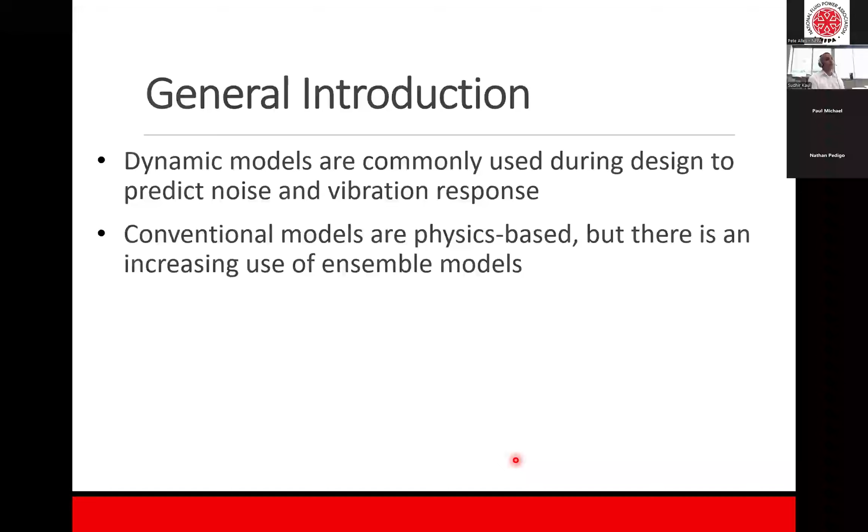So the most common models traditionally used for evaluating vibration response and predicting noise response are dynamic models. Conventional models have typically been physics-based, but there is an increasing use of ensemble models for many noise and vibration problems, because they allow us to go beyond physics models and address things like nonlinearity or interdisciplinarity between noise and vibration. A traditional physics-based model gives you a vibration model or a noise model, but ensemble models allow us to have an interdisciplinary model that represents multiple things in the same model.

The most prevalent use in ensemble models is of neural network algorithms, used to overcome some of the constraints typically posed by physics-based models. I'll subsequently talk about the use of ensemble models a little bit more later in the presentation, and they're very useful and beneficial for diagnostics and condition monitoring that we'll also talk about later on.

In terms of classification, there are various means and terminology you may encounter when looking at NVH or NVH systems, classifications or subsystems. So I'll quickly go through some of the classifications here. The most traditional way to classify noise, vibration, harshness models is a single degree of freedom or a multiple degree of freedom system. In practical systems, it's very rare to encounter single degree of freedom systems; most practical systems are multiple degree of freedom systems. However, a single degree of freedom system is oftentimes the building block for multiple degree of freedom systems, or allows us to capture the essence of many systems as well.

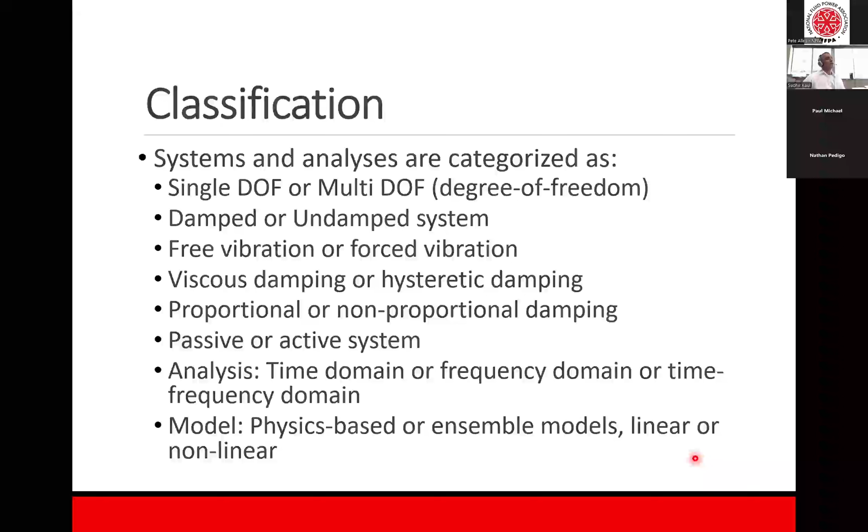There is increasing use of what's called the time-frequency domain, which is a combination of time and frequency domain together. Finally, in terms of models, the classification is generally done as physics-based models, which is more traditional, or ensemble models, which is a more recent development using neural networks or machine learning-based algorithms. And then another classification in terms of modeling is linear or nonlinear.

So we'll start with a couple of slides covering the building blocks of the typical response and characteristics of a single degree of freedom system and multiple degree of freedom systems before we go to mitigation.

The bread and butter of a fundamental poor man's vibration model is a 1 degree of freedom spring-mass-damper model, shown here with the spring, damper, and mass or inertia of the system. The typical response of a single degree of freedom system looks like this. In the modeling world, typically you start with this and get here; in the testing world, you start from here and reconstruct the model. Both are very commonly encountered in many applications and industries.

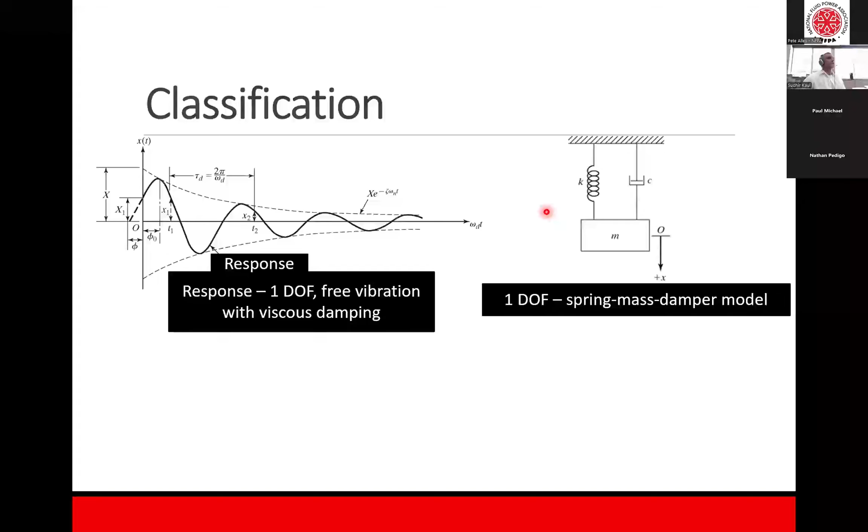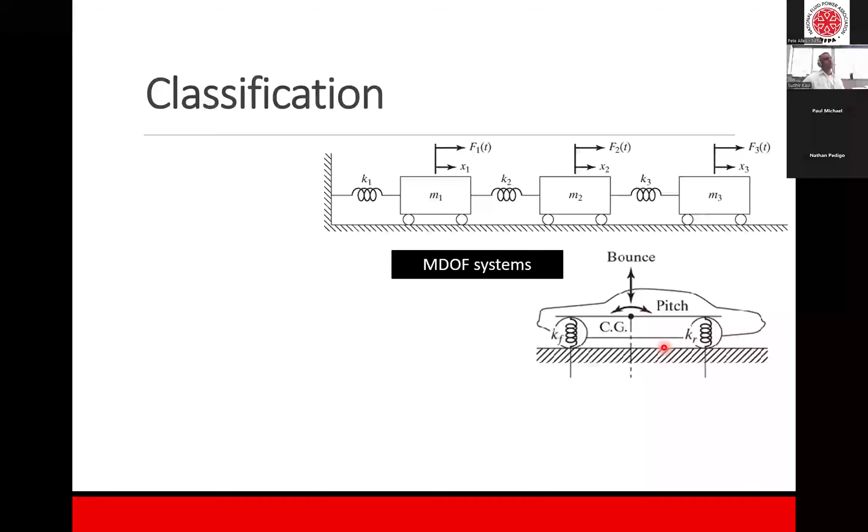The counterpart to the single degree of freedom system is a multiple degree of freedom system: 2, 3, 4, and so on. Here are two cartoon sketches of what a multiple degree of freedom system would look like. This system has 3 degrees of freedom, 3 lumped masses used to characterize it. This is an automotive application with 2 degrees of freedom, bounce and pitch, which are coupled together, representing the planar dynamics of the system.

The second thing that becomes important in multiple degree of freedom systems is the corresponding mode shape of the system, which we don't see in a single degree of freedom system because there are two modes you're looking at, not just one direction or one coordinate. In the testing world, you test the system to gather the natural frequencies, do modal testing to capture the mode shapes, and then go back and build the model. In the modeling world, you go the other way around, like we said in the previous slide.

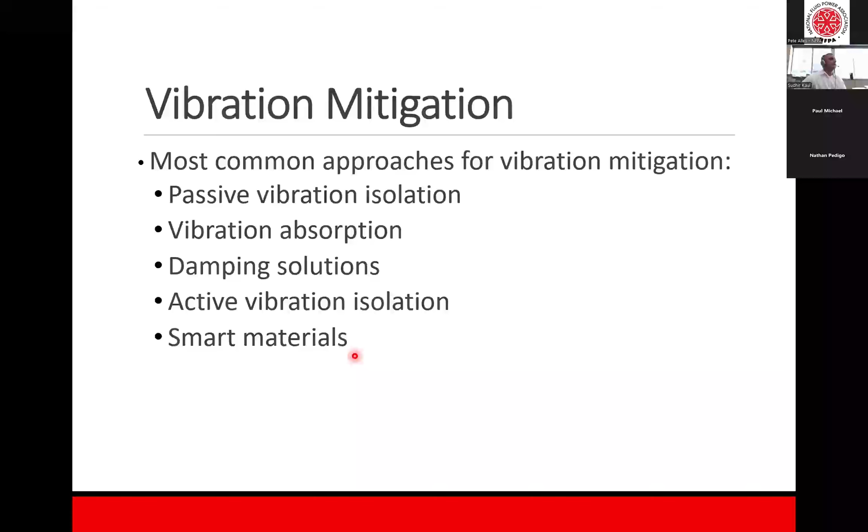With that quick background, I want to talk about mitigation strategies for vibration. I've listed the most common ones used - some are more traditional, some are modern and non-traditional at this point in time. We'll start with simple passive vibration isolation, then vibration absorption, damping solutions intertwined with active vibration isolation, and smart materials. The last two are more modern, increasingly used in the last 15, 20 years.

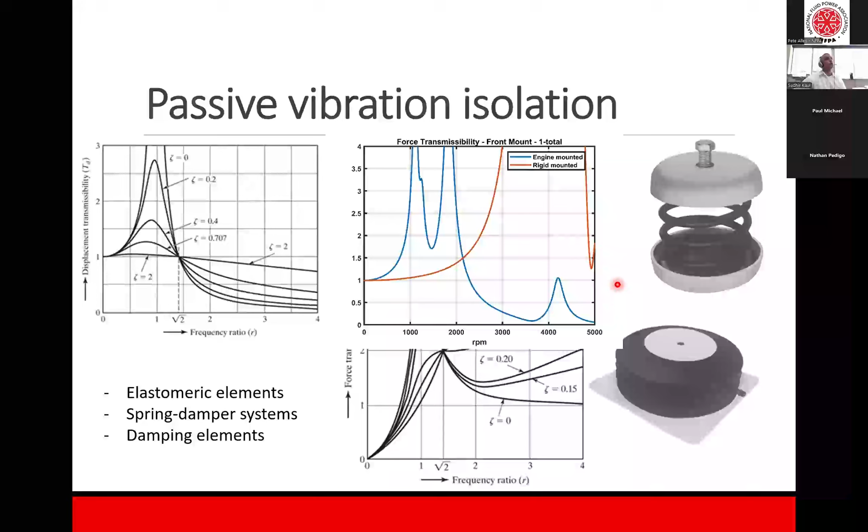There are many manufacturers that will provide you with a large catalog of parts that looks like this, or this, or this - there are 4 or 5 big manufacturers. I've borrowed these figures from Trelleborg, one of the big manufacturers, but there are other manufacturers who will provide a catalog of parts and even help you identify a solution that works for you. If your production volume is large enough, you can customize, pick and choose, and build a mount or an elastomeric system that's some combination of these, developed in collaboration with the mount manufacturer.

The second solution in vibration mitigation is typically called vibration absorption. A cartoon sketch rendering of that looks like this. The system we are looking at is a single degree of freedom system, which is isolated. This is the isolated system, and this is the single degree of freedom system. This is what we call the dynamic vibration absorber, where we have added an inertia or mass with a stiffness and/or a damper to the system to particularly target a single frequency of operation.

The solution for this would look like this. If the x-axis you're looking at is the frequency ratio, without the absorber, so without adding this entity, you're looking at a response which looks like this.

If the frequency that you are interested in is in this range, then adding an absorber with this mass ratio shifts the frequency into two frequencies, one to the left, one to the right. However, the response in this particular range is significantly mitigated, as you can see here.

The ironic thing here is, unfortunately, the terminology used in the industry is called vibration absorption. Vibration is not really absorbed anywhere because you're not absorbing the energy anywhere. You're just adding a system and then moving the frequency response such that the frequency range you are interested in sees a much smaller response as compared to the frequencies you were primarily targeting.

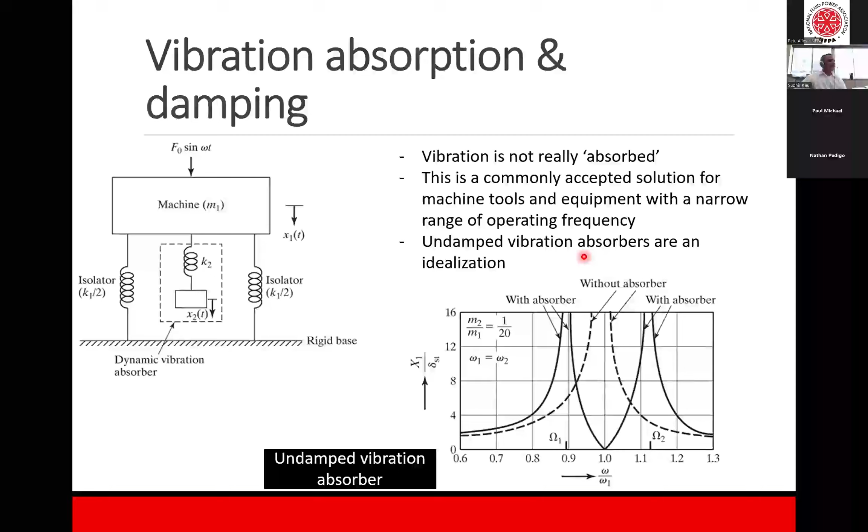So to summarize, the damped vibration absorber is a realistic representation of a viable solution for a vibration absorption system. A spring damper with an additional mass is what we are basically looking at as a practical way of adding the vibration absorber. Design decisions on tuning the absorber typically entail the selection of a mass, selection of the stiffness, and corresponding damping associated with that stiffness.

Absorbers are relatively more common in stationary applications, or like I said, in machine tool applications where the frequency you are interested in is very narrow.

The counterpart to the last two mitigation solutions I talked about is use of smart materials and use of active vibration isolation. So I'll start with hydro mounts. Although hydro mounts don't by themselves classify as a smart material or an active vibration solution, they are a step in that direction.

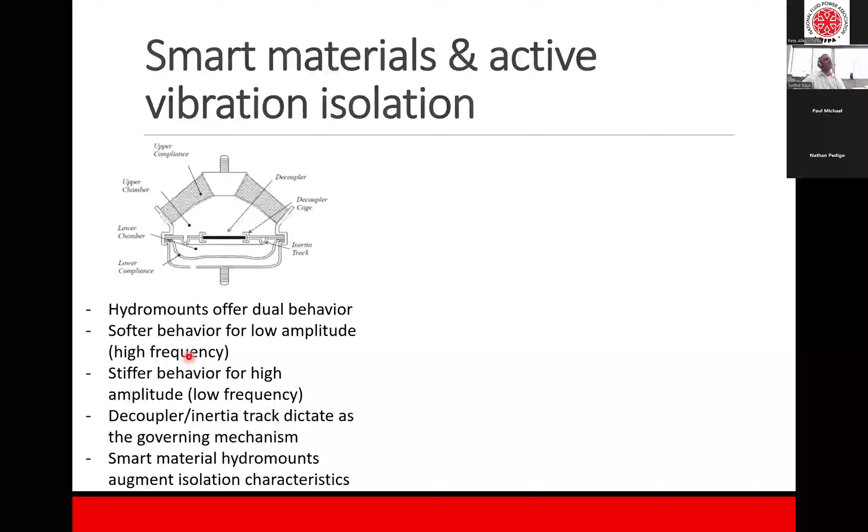Further augmentation of hydro mounts or smart materials in general is the use of MR elastomers, or magnetorheological elastomers, which allow variable stiffness and variable damping characteristics.

The fluid itself has been used in many damping applications for the last 25 to 30 years. It is a suspension of micron-sized magnetized particles dispersed in a carrier fluid with additives.

But the MR elastomer itself, MRE, is a composite material that consists of an elastomeric matrix as the core of the system, with MR particles used as the filler material.

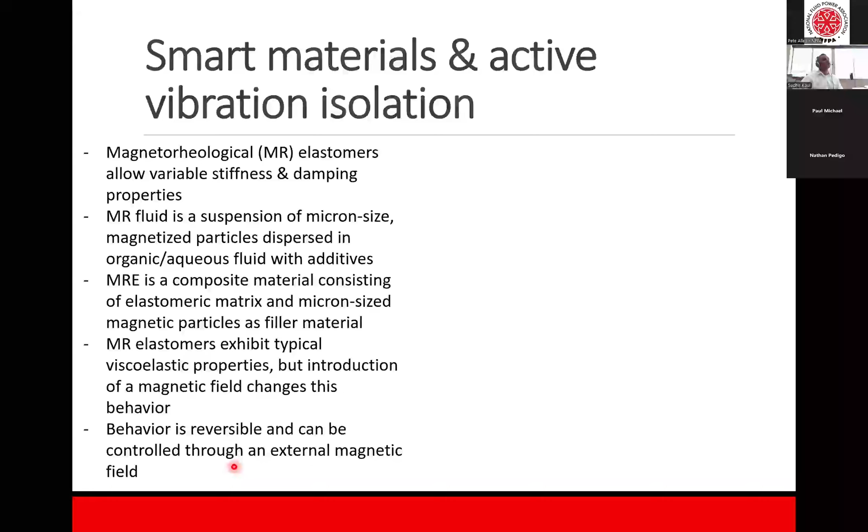This allows the MR elastomer to exhibit a typical viscoelastic property when there is no external magnetic field introduced. But when a magnetic field is introduced, you start seeing different behavior of the MR elastomer. Luckily, the behavior is reversible, so it can be controlled through an external magnetic field.

The modeling aspect of MR elastomers is slightly more complex than the typical single or multiple degree of freedom system cartoon sketches I showed earlier. Nonetheless, it's more and more prevalent now, and some manufacturers have started using MR elastomers or MR dampers in many high-end applications.

I'll take a small break here and see if there are any questions before we proceed to noise mitigation.

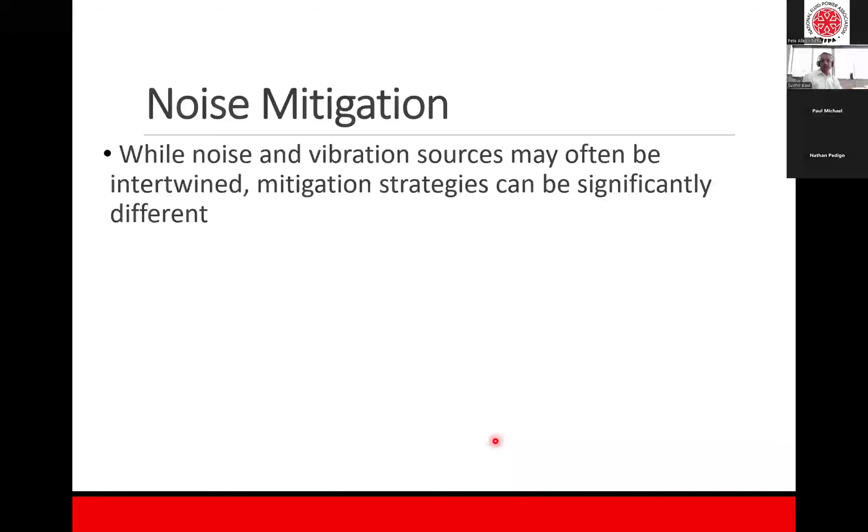As I mentioned earlier, while noise and vibration sources may often be intertwined, the mitigation strategies can be significantly different. The solutions for vibration mitigation may be very different from the solutions for noise mitigation. In fluid power systems particularly, I know we have a subsequent speaker who may be addressing this directly.

The pump is often the primary source of noise. So the design approach is either going after the source of noise, or leaving the source alone if the solution is too expensive, and then looking at alternative methods to mitigate noise.

The mitigation strategies could vary from fluid wave actuators, suppressors, silencers, or attacking the root problem, which is the design of the pump itself.

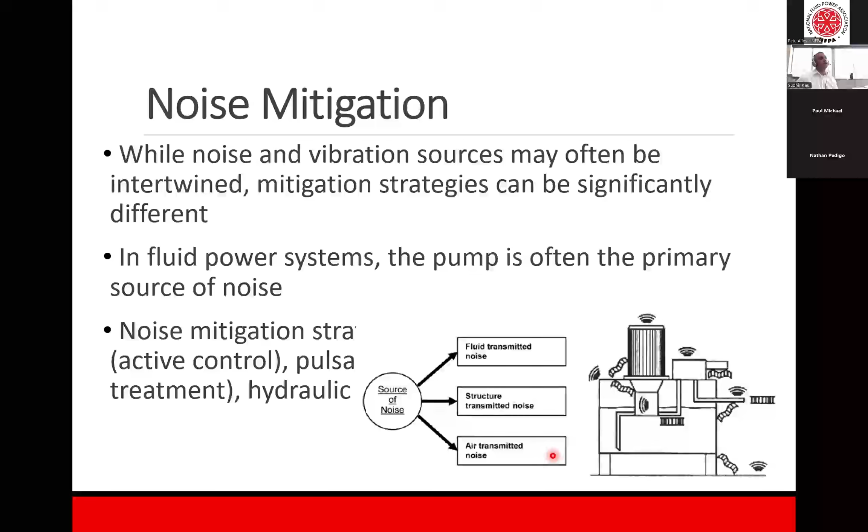Overall, in terms of transmission, particularly for fluid power systems, we are looking at different kinds of transmission: fluid transmitted noise, structural transmitted noise, or air transmitted noise. Each one of these has different solutions and different mitigation strategies.

I have borrowed from reference literature to encapsulate noise mitigation, particularly in the context of fluid power systems. I think there are a couple of subsequent speakers who may talk about these in much more detail than I have captured here.

What makes things more complex, particularly in fluid power applications, is that the fluid power system gets designed and then used in different applications. The noise may result from interactions between several subsystems, making it even more challenging to have a universal design which can address all the noise mitigations.

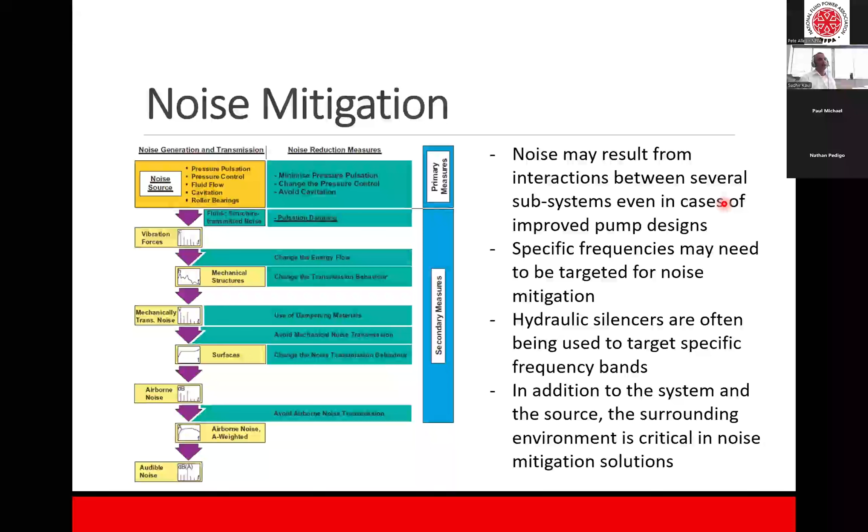Furthermore, specific frequencies need to be targeted for noise mitigation. Hydraulic silencers I have seen in recent literature are often used to target those specific bands. In addition to the system itself, the surrounding environment is very critical in the noise mitigation solution. So there is no one solution applicable to all kinds of applications for fluid power systems or any other systems in general.

A relatively recent offshoot of NVH is condition monitoring and system health monitoring. So the next couple of slides, I'll talk a little bit about the use of NVH for condition monitoring and SHM, which is the structural or system health monitoring.

Condition monitoring typically entails the use of sensors and data collection, and it could be vibration related or non-vibration related. For example, collecting vibration, temperature, pressure data, etc., to reduce an unplanned stoppage or maintenance. The governing principle here is that we want to collect data so that we can predict failure and prevent failure by intervening before failure happens.

It plays a critical role in enhancing productivity, improving safety, and scheduling preventive maintenance. The most common techniques I have encountered related to NVH are acoustic emission, thermal imaging, and general vibration monitoring, which are very common for condition monitoring in general.

The typical methodology is encapsulated in a couple of figures I have shown here. Generally, we'll do some experimental design and some simulation modeling that ends up resulting in a database that is built to then diagnose the condition monitoring that one is targeting.

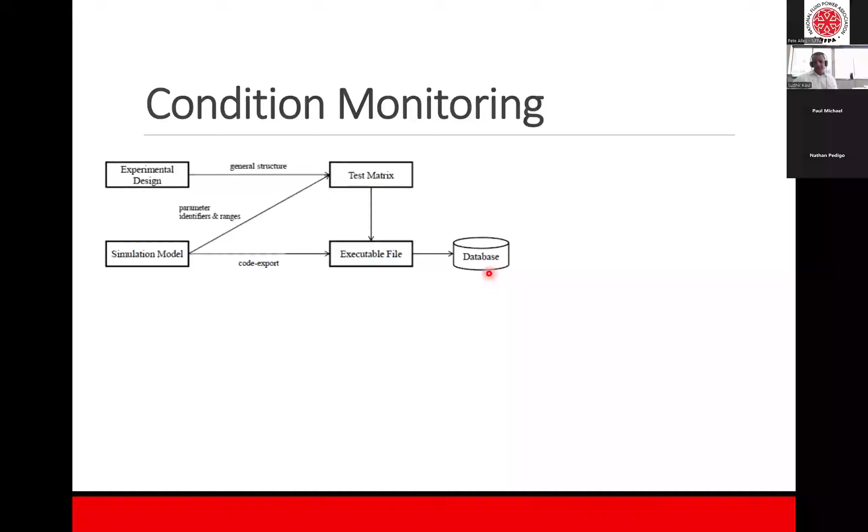Specifically looking at vibration testing data, the vibration data is collected and then fed through different kinds of models. Here I have borrowed a powertrain example, fed into an ensemble model where you diagnose different kinds of failures. For example, a tooth failure, a surface wear, etc., are the different kinds of predictions resulting from condition monitoring and ensemble modeling.

There is an increasing use of deep learning in ensemble modeling, and an increasing use of machine learning algorithms. The development of ensemble models is happening in conjunction with the development of digital twins in some large complex applications where folks do have the data and the bandwidth to develop a digital twin of a large complex system.

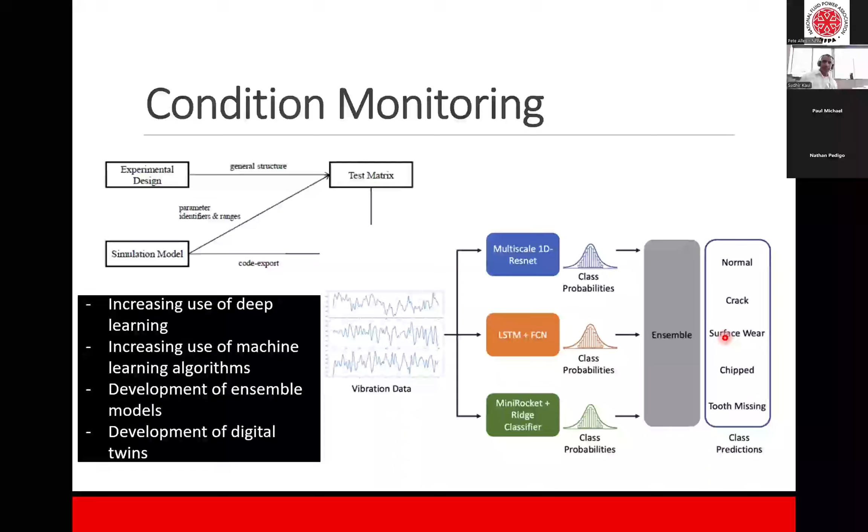The use of SHM, structural health monitoring or system health monitoring more loosely, could be explained as an extension of condition monitoring. In other words, CM is a subset of the overall system health monitoring or structural health monitoring of a system.

SHM typically pertains to the continuous vibration data collection for large and complex systems. The aim of data collection for SHM is typically much broader than just condition monitoring, where you are focused primarily on enhancing productivity or enhancing safety by intervening before failure happens.

Augmenting physics-based models or developing ensemble models, building digital twins are all larger goals of SHM, which are in addition to just system maintenance and condition monitoring.

Sudhir, we do have a question. Yes. The question is, are the magnetorheological damping response times fast enough to be used in vehicle suspension systems?

Yes and no. If it is a typical damper that is used, the answer is that the response times are slightly longer, but we are talking about milliseconds. But if it is integrated with the use of elastomers, the response time is much faster, because then you still have the fundamental damping and stiffness offered by the magnetorheological fluid in conjunction with the elastomer matrix that's being offered.

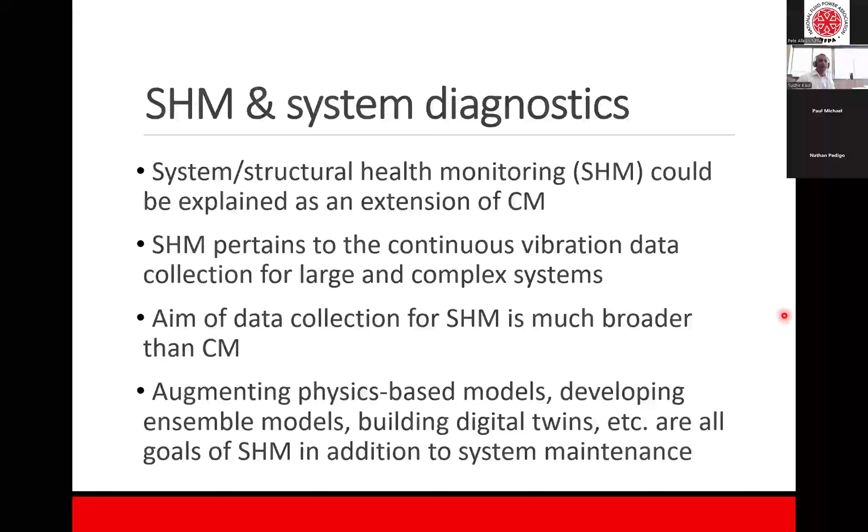So next few slides on NVH in fluid power. I hope that excites folks a little more than the rest of the previous presentation. I'll talk a little more about the use of NVH in fluid power in different ways, and I hope that this is a good building block for subsequent presenters who will talk in a lot more depth on fluid power.

The pressure and flow demands in fluid power applications can vary significantly, as most of you may know much more than me. Independent metering solutions have been increasingly used to reduce energy consumption in many fluid power applications. Although they may reduce energy consumption, they do end up giving us a little bit of a penalty in lower damping and therefore increased vibration.

So when I talk about independent metering, this is what a typical sketch looks like. I have borrowed these sketches from a couple of references, which I have listed at the end of the presentation, so folks can look at this in more detail by themselves as well. The typical gain between the traditional system and an independent metering system like this is, like I said, the big gain is saved energy. However, the small price to pay is lower damping, therefore higher vibrations in these cases.

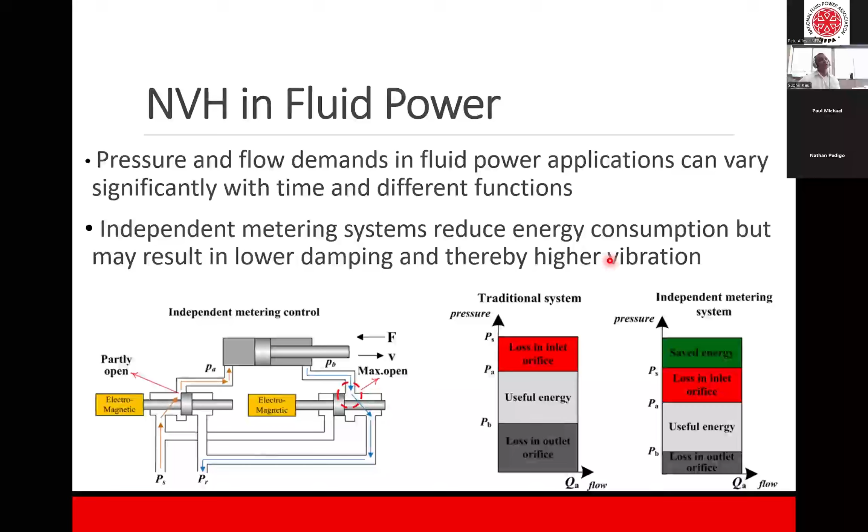There are multiple solutions of enhancing damping in fluid power systems. I'll quickly show a few examples here and we'll talk through all of them. I picked four from a couple of references I was looking at. Let's start with the most basic one, physically adding damping to the system to enhance the overall damping of the system.

Another possible means of achieving the same without adding physical damping is the use of an accumulator, which is common in some fluid power applications. But there are even other options, like using the positive opening valve shown here, or using a bypass valve shown here. There is no slam dunk here. All of these come with pros and cons, with response time, increased cost, complexity, and so on and so forth.

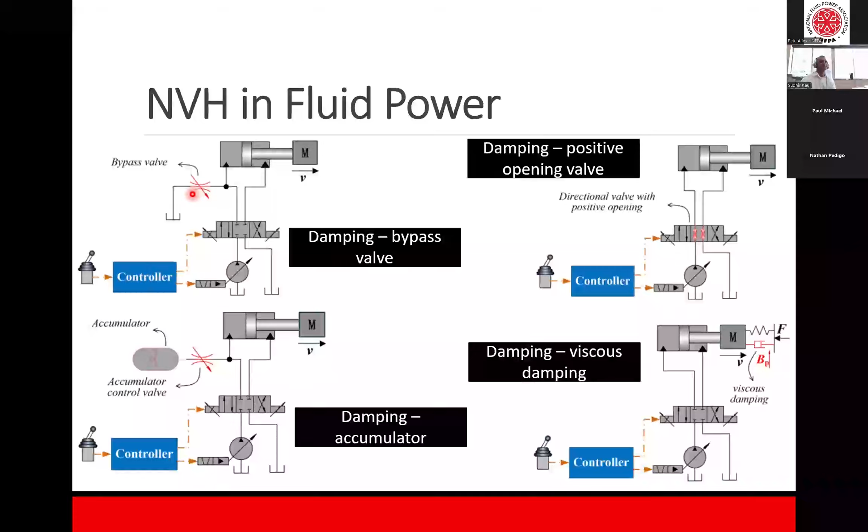In fluid power applications, based on what I have seen in most of the recent literature, acceleration feedback or pressure feedback provides additional means of control that can be used for enhanced damping in most systems and applications. Hybrid methods that combine pressure feedback with active damping do demonstrate a very high amount of vibration mitigation in many fluid power applications.

And finally, in mobile hydraulic applications, the complexity of mitigation is even greater because there are intertwined considerations associated with machine life, the application you're designing for, operator comfort, safety, etc.

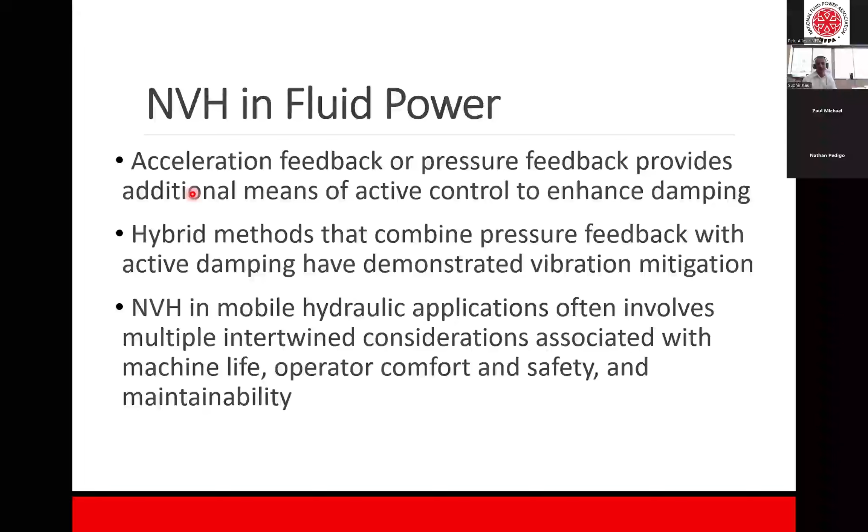Finally, as I mentioned before, design changes, material selection, damping, environmental design, and protective gear are all possible means of mitigation, particularly for noise.

Stefan, can you please load your presentation? Share your presentation. Yes, I will. Thank you for the introduction. Can you hear me good? Yes, we can. Very good. So I make sure here that I get started. Let me see, there it is. Now it's back there. Show caption. Can I ask you something? Yes, oh now I see it's green. Perfect.

Welcome everybody, and thank you to the presenter before me, because I think this will be a follow-up to what he was talking about, and give you some ideas how customers are actually testing products in vibration systems.

I already had a nice introduction, so I'll continue to explain what I'm going to talk about today. First, I'll give you a little background about MTS if you don't know who we are, a little bit about what our components are testing on our vibration systems, and then a very high level about vibration testing and examples of test solutions. In the end, I have 3 real-world applications, how customers are using our system to solve different issues: battery pack testing for vehicles, fuel tank testing, and fuel slosh systems. It may not be directly applicable to what some of you are here for, but it can give you ideas of components that are part of any fluid analysis in a laboratory.

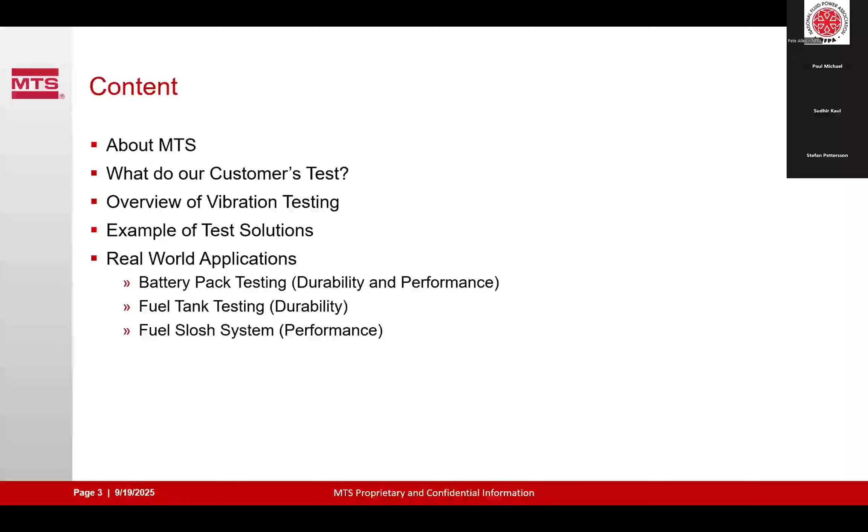So a little bit about MTS. There's a link at the top, and this presentation will be shared, so you can learn more about us there. We are located in Minnesota. We have affiliates in Sweden, England, Germany, Italy, France, India, China, Japan, and Korea. We also work with business partners. We were founded in 1966, and we were acquired by Illinois Toolworks, ITW, in 2021.

So what is MTS doing? We are providing hydraulic and electric test equipment solutions and services globally. We have 4 business units. We have ground vehicles, GRV for short. Here we work with customers providing passenger cars, light truck, heavy truck, rail, Formula 1 racing, motorcycles, ATV, etc. We work with OEMs, contract test labs, sub-suppliers, and even universities.

The next business unit is materials. We also do structures and aero, and service and aftermarket. In materials, you're looking more into strength of materials, small specimens to understand the properties of a material. Structures and aero - structures are mainly doing earthquake testing, primarily for medical equipment but also for buildings. We also work with aero customers that are designing and manufacturing airplanes. A key part of our business is our service and aftermarket products. We don't do any testing ourselves; we provide solutions for our customers.

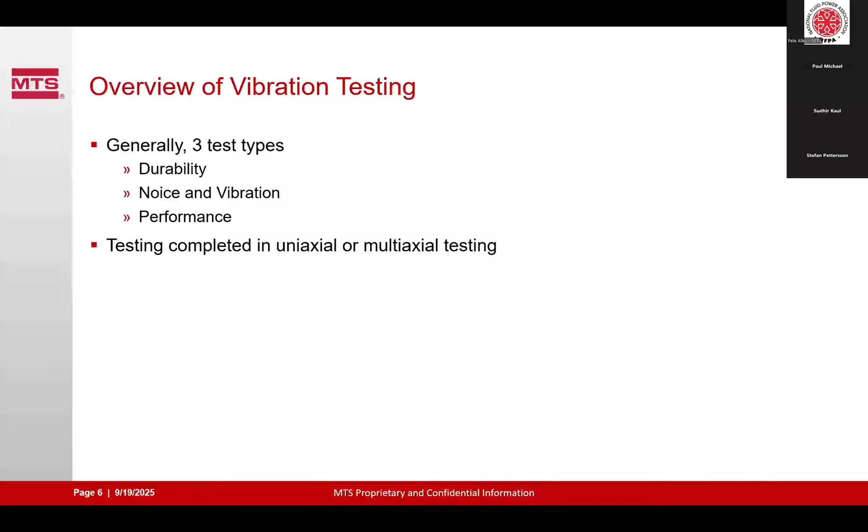So for durability testing, you're reproducing acceleration and time histories or power spectral densities, the environment that the test object is exposed to. These tests are usually run to failure or for the duration of its expected life.

Noise and vibration testing are typically lower amplitude tests, can be a combination of time history and sine sweeps. And here we can also integrate our vibration system into an anechoic chamber.

Performance evaluation is kind of a combination of durability and other effects. So here we can again see transmissibility as ride comfort, human in test space, but also aging. So we can install our system in temperature chambers or environmental chambers and expose the specimen or the test object to both temperature, humidity, solar, such as heat load.

Talking about testing requirements, it's important to understand how the component is exposed to vibration. There are different ways to define what the requirements really are.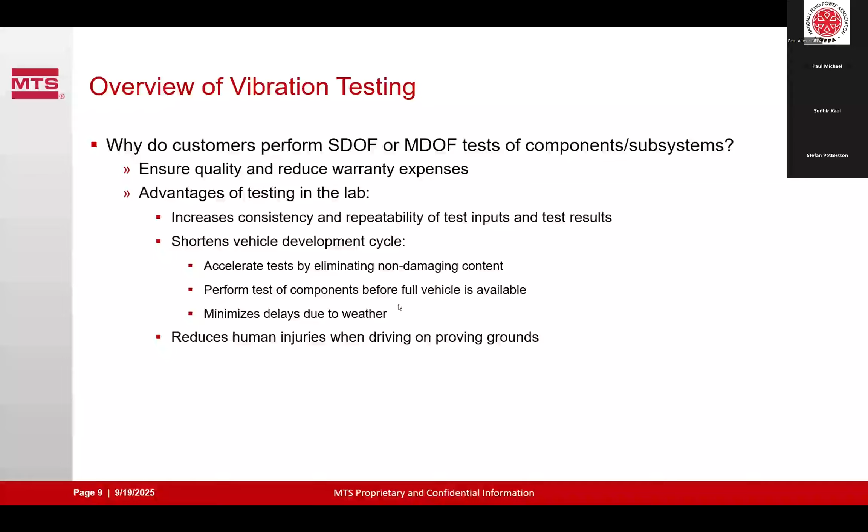So coming back to this proving ground, that was how customers developed and tested their vehicles in the past. Here they ran 2 shifts per day, and for about 6 months, to validate the life of a vehicle or a component.

So I can make a break here and ask if there are any questions. So I don't think there are any questions. No questions at the moment.

Okay, so here you see some example test solutions that are sized for, in this case, table size or mounting surface. Also for mass, we will size an actuator for the specific specimen and for the control band frequency.

So what you see to the left here is a uniaxial system that is vertical.

It's a hydraulic test system, from MTS. What you see in the middle is an electrodynamic shaker system. There are many benefits with both hydraulic test equipment and electrodynamic test equipment. MTS doesn't provide electrodynamic test equipment like you see in the middle, but they're frequently used in uniaxial test systems, and here you can reach frequencies much greater than with the hydraulic test system. The system to the left, you can probably test up to 100 or 200 hertz. The systems in the middle can probably reach control band frequency up to 2000 hertz or more. The picture to the right is a MAST system - a multi-axial simulation test system.

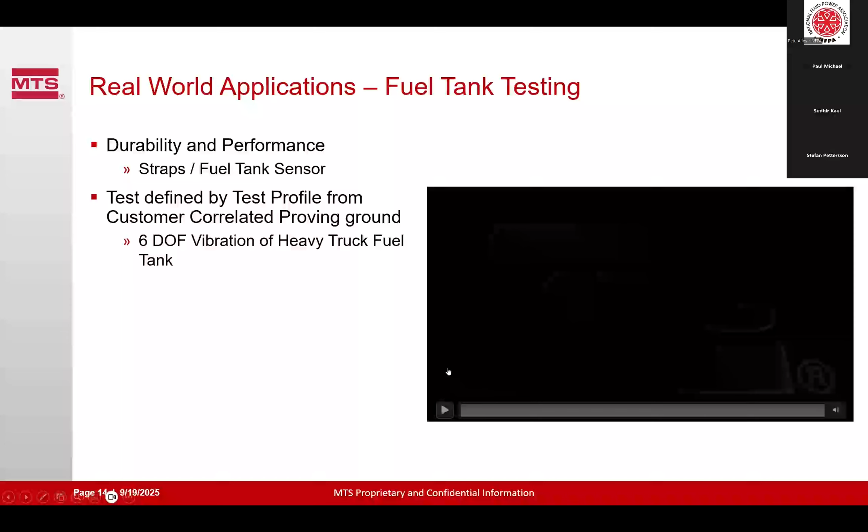So this is a test fixture that the customer built. Here's the truck frame, here's the fuel tank, and they were validating the straps holding it in place. They were failing the straps out in the field, and this system helped them solve that—they had no issues with the straps after this.

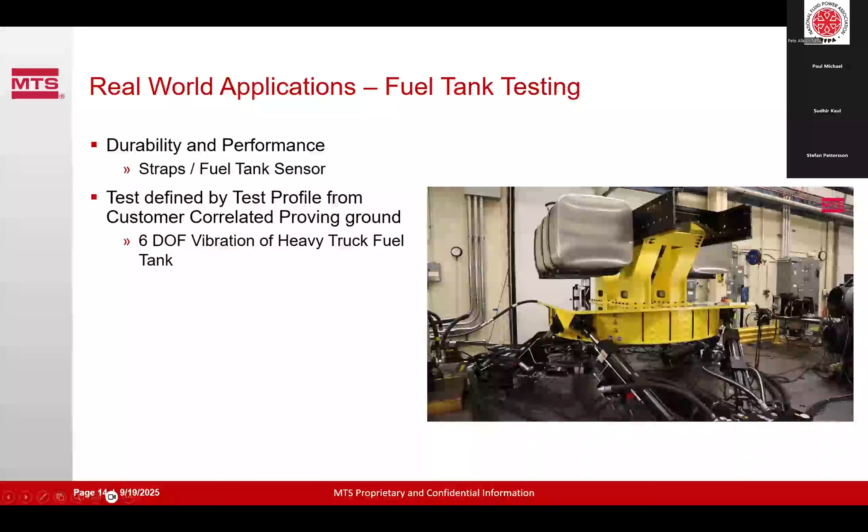So I have one more here. Let me see if there's any more questions in the chat or not.

So the last one here is a fuel slosh test for an airplane application. I can't show a picture here because I don't have permission from the customer to do so, but I can at least show the system and give you an idea of how they tested this one. Again, it was both a durability and performance test—I'd say more a performance test than durability—but it's looking at the fuel tank sensors in an airplane wing.

In this case, they had 105 sensors that were monitored consistently during the test. The idea was to test and make sure the sensors were functional at all times—they had redundant sensors too, of course, but with different fuel levels in the airplane wing. The test was defined by airplane wing motions: landing, takeoff, etc. There was a 2-degree-of-freedom vibration airplane test, where we control the system into roll and pitch, with the profile being sinusoidal or triangle form.

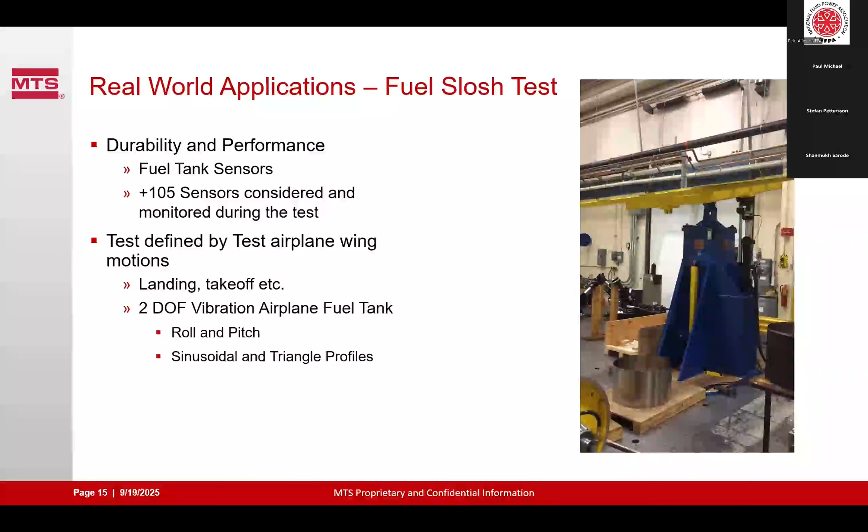So here you can see the system—the airplane is taking off in this case, very steep, and then the next event will do a dip down as they're doing it. It doesn't look as dynamic as the other one, but the idea here was really to test and make sure the sensors inside the airplane wing were functional at all time.

So I think that's pretty much what I had for today. I can definitely follow up with some ISO standards for NVH testing. The majority of what our customers do is durability testing, and when they do NVH applications, they're mainly listening to, for example, dashboards, seats, and doors, because they want to minimize the sound inside the vehicles to make it as comfortable as possible. The only standards I've really seen around it for other applications are around seat testing.

Stefan, this is Pete. I see there were a couple of questions put into the chat—let me give you some of these. One of them is: how are the test machines actuated? Do you find this to be a limitation to create an equivalent vibration profile to what you see in the proving grounds?

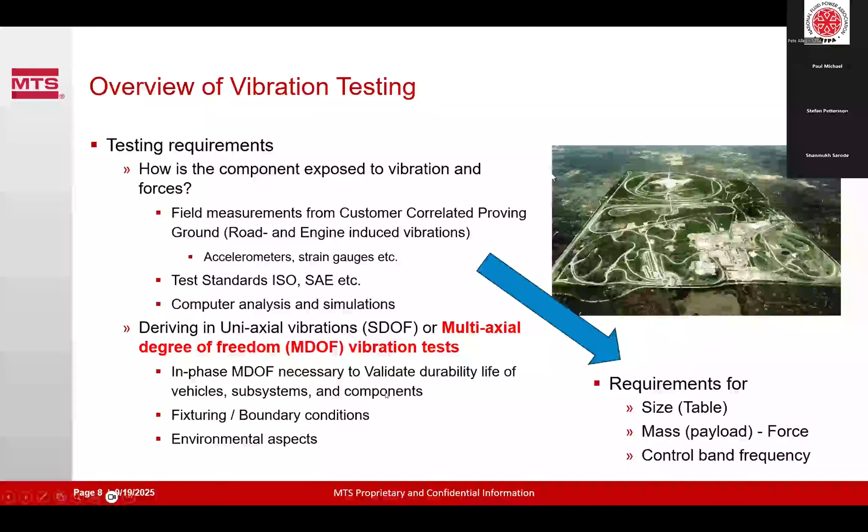Coming back to one of my earlier slides, when you're moving from the proving ground into a test, the fixture and boundary conditions are critical, and it's very challenging for customers. If you're looking at this battery pack testing, for example, we have a stiff table, and this is a pretty condensed design of a battery pack because it's agricultural. But if it were a car battery pack, it would be more distributed and part of the structure of the vehicle. So on a MAST system, it can be very challenging to see all the modes of the battery, because you can't induce any twisting and bending modes. There are solutions for it, but it also increases the complexity of the system. So it's definitely a challenge to move from the proving ground into a test environment.

Okay, thank you. Another question: how important is it to also take into account rotational accelerations? I would say it's critical, but the minimum, as I see it, would be 3 degrees of freedom. That's usually what you see. So if you're thinking about a battery pack again, there are rotational accelerations around X, Y, and Z, and we are trying to provide those as well. In the real world application, there are rotations, so they should be considered. But on some MAST systems, that's very difficult to do because of the stiff tables.

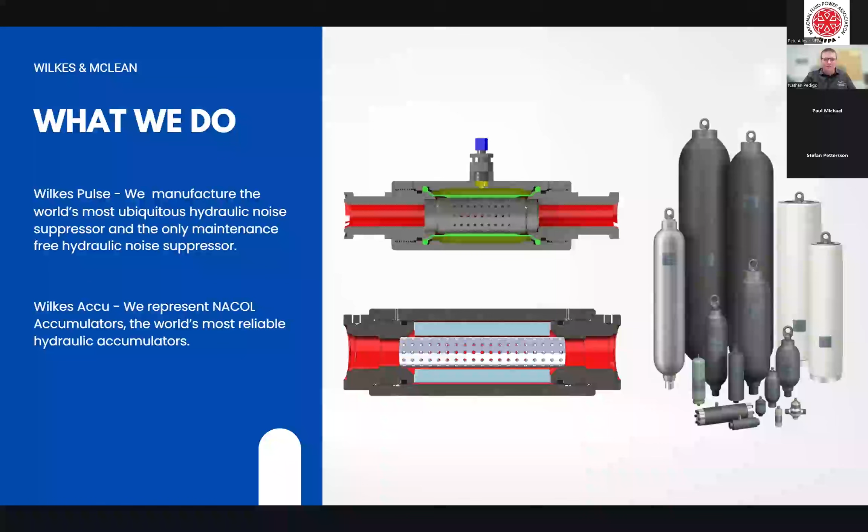A little bit about where this presentation is going to go: first, I'm going to run through the basics of some core principles of noise control engineering as a field. I'm then going to discuss how our suppressors actually work, and then I'm going to present a few case studies. At the end of each of these sections, I'll take a brief break for some questions.

Noise control engineers usually think about noise in terms of quantity and quality, kind of like Sudhir mentioned earlier. The quantity is the actual volume of the noise. When I say noise, I mean it in broad terms - whether it's in vibration, oil, or air, it's all acoustic energy, so to me it's all noise. But in air, you have the risk of creating hearing loss if the intensity or power is too high, and it can also cause disruptions to communications, which can be very dangerous on job sites.

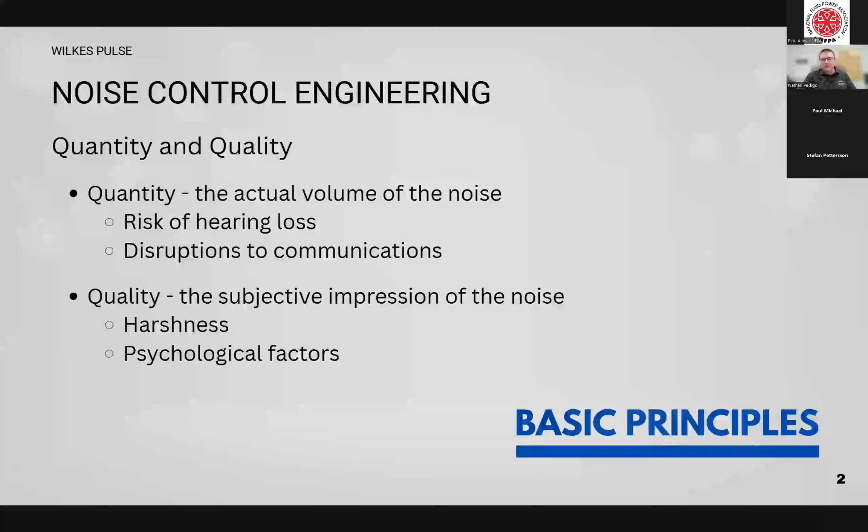The quality is the subjective impression of the noise - this is where you get into things like harshness and different psychological factors. Like nails on a chalkboard - everyone hates that because it has certain characteristics that are particularly grating to humans. We think about that too. It's usually a secondary issue for noise control engineers, but not always, and even some local, state, and federal regulations take into account those psychological factors.

No matter what the medium is, I just think of it as noise, but there are a lot of different words for what you might call noise in each of these systems. Fluid-borne noise is usually called pulsation or pressure ripple by our customers when they contact us. Structural noise is usually talked about in terms of vibration or shaking. It's also important to note that fluid-borne noise and structural noise are very interrelated, because the stiffness of those two media is actually pretty comparable, so there's a lot of interaction between vibration and the noise in a pipe.

Airborne noise - most people will just call this noise. Some noise control engineers call it breakout noise, to differentiate it from other types of noise in a system. Again, there's a coupling between the structure and airborne noise for a hydraulic system. We don't usually consider the air-to-structure noise path for that energy because the energy is way, way lower in airborne noise. For reference, you're talking about microwatts for airborne noise, and for structural and fluid-borne noise, you're talking tens, hundreds, even kilowatts.

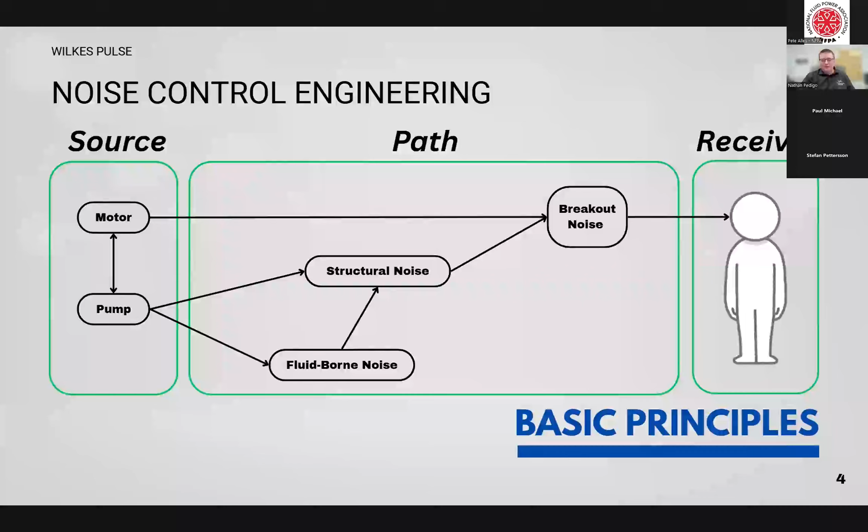And then you have your receiver. Basically, as soon as you've created noise, the receiver will notice it. This isn't super critical all the time, but sometimes it very much can be, and a lot of times in hydraulics, it is. I'm sure everyone in this seminar has been in a pump room that's been quite frankly unbearable.

So NCEs try to intervene as early as possible in that source path receiver model. This is because the noise hasn't been amplified yet, so our intervention can be a lot smaller, and because it's dealing with a lot less energy, it's typically going to be less costly.

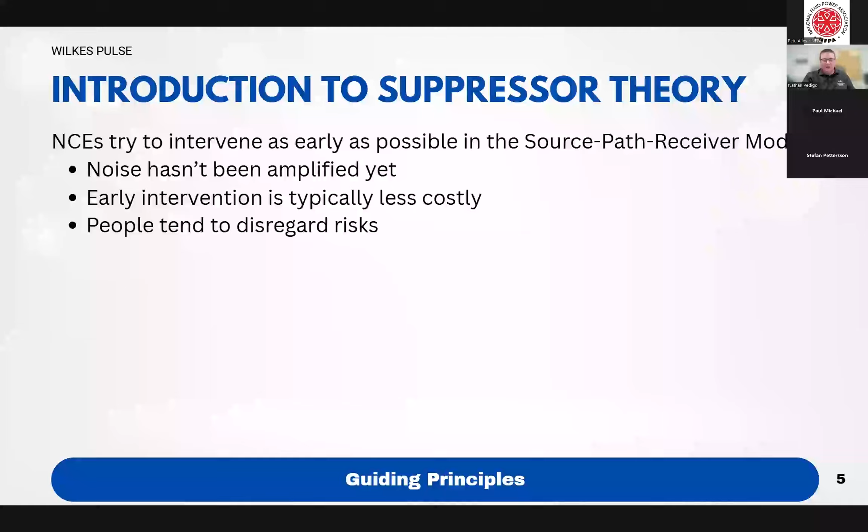The other thing that's critical here is people really do tend to disregard the risk to their hearing. I can think of just everyone I see on a day-to-day basis with earbuds in, blasting the music to where I can hear it passing them on the sidewalk. It's not painful to them, but they're probably listening at a level that's going to be damaging to their hearing in the long term. And if you're not going to get those acute hearing impacts, most people just think, oh, I'm safe, so they won't wear hearing protection.

So suppressors really do prevent that transmission of the fluid-borne noise throughout the system. We always tell our customers to install the suppressor as close as possible to the noise source. In a lot of systems, it's going to be the pump. This is because it really mitigates the risk of structural noise later on that's going to cause breakout noise. Also, being as close as possible to the pump limits the amount of area where you're going to have an increased amount of acoustic energy being able to break out.

Multiple types of interventions are necessary for most hydraulic systems. As I've indicated a couple of times, almost everyone will have their HPU on vibration isolation pads. That prevents the ground from shaking, or if they're on the second floor, it prevents the whole floor from becoming a bit of a speaker. Also, things like enclosures are very common. Even a submerged pump is really kind of an enclosure from an acoustic perspective, because you're putting that pump inside of the tank, preventing more of that acoustic energy from being transmitted.

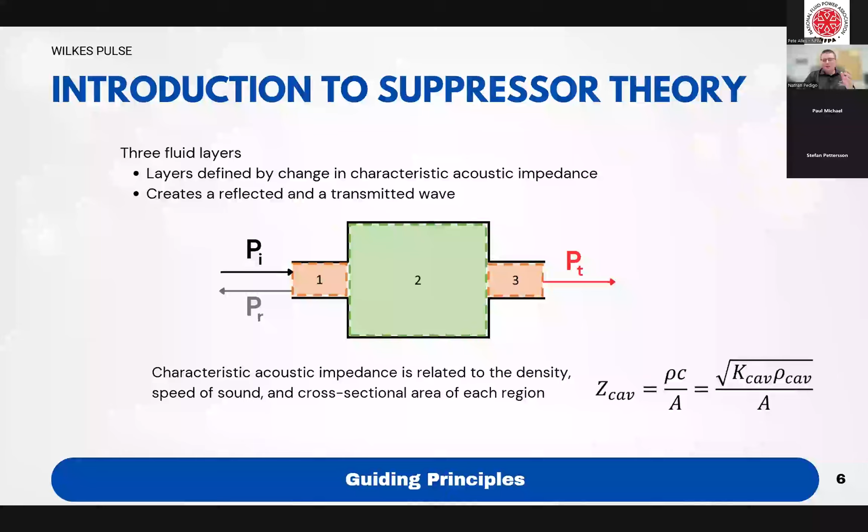So as I said, the nitrogen is trapped by the bladder, and again, just thinking about it in terms of the bulk modulus and density rather than density and speed of sound. The bulk modulus can be found in a way that's pretty analogous to springs in series, but you volume weight it based on the volume of what they occupy inside the cavity.

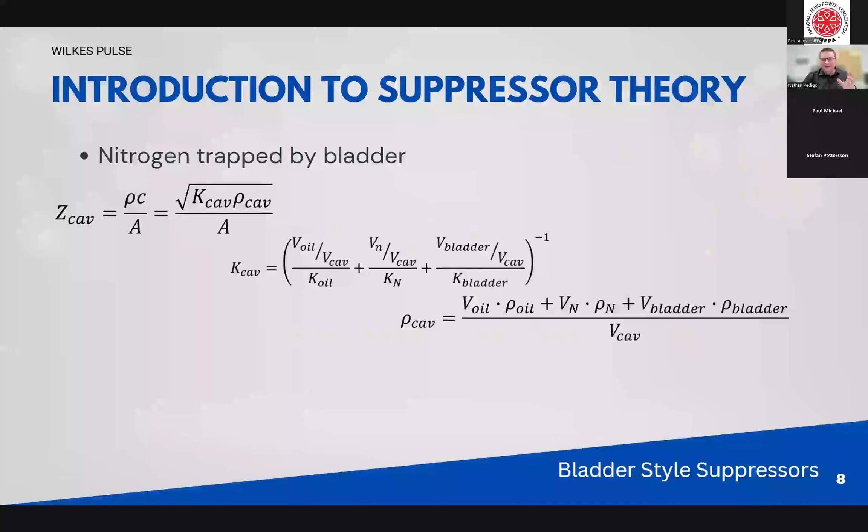Similarly for the density, it's just going to be the volume weighted density within the cavity. And these are going to be effective numbers, so it's not really a high resolution kind of modeling that I'm talking about here. It's pretty basic, just to get you the idea, because really getting into the nitty gritty of all that can take weeks or months to really understand.

So these bladder style suppressors are really, really highly effective for being that size. They'll reduce noise by up to 30 dB from 50 hertz to 5,000 hertz, and that's the noise in the oil. It's harder to talk about the noise in the air, but we will talk about that in one of the case studies later.

This design has been refined over 40 years. At this point, I think we probably have close to 45 or 50,000 of these out in the field, all over the world. And we've really done a lot, listening to customer feedback to try to improve the performance and increase the reliability of them.

So this is a cutaway of our new energized sleeve suppressor. The energized sleeve suppressor is pretty similar, it operates on the same basic principles as the bladder style suppressor, but it's using a lot of different techniques. Again, the ports here and the shell are there just to interact with your system and to withstand the pressure. Here, all of the acoustic property manipulation is done through the actual energized sleeve.

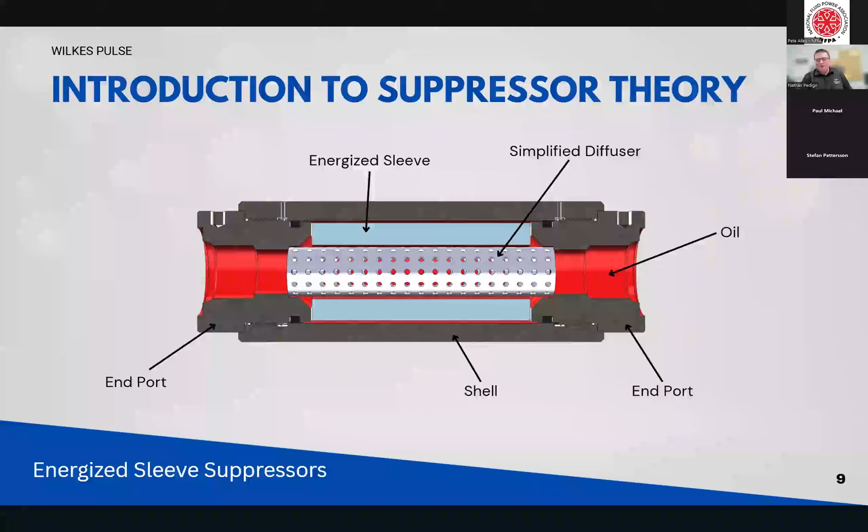That energized sleeve is going to be annular segments that go around a simplified diffuser. The simplified diffuser here is primarily there to retain the sleeve inside the suppressor so you don't get it shooting downstream, which is not a particularly fun cleanup day from personal experience. It will give you some impact at very high frequencies, like 5,000 hertz, usually outside the region that most people are concerned with. That diffuser will very, very rarely have any kind of effect on the acoustics, but it does have some.

So the energized sleeve itself is a proprietary syntactic foam that we have developed. It took about 10 years to fully develop that. It has a urethane host matrix, and the inclusions are polymeric spheres. These spheres are very, very, very small, about 20 micrometers in diameter, just to give you a little reference. So each bit of foam, each small chunk, will have millions or billions of these spheres in them.

Again, discussing the characteristic acoustic impedance in terms of the bulk modulus and density, it's pretty much the same as before, except now you have to figure out what the bulk modulus of that foam is. As it turns out, a guy named Hashin in the mid or early 70s figured out how to model the bulk moduli of syntactic foams. So he came up with this equation.

I've modified the nomenclature just a little bit to be more specific to this application, but the bulk modulus of the foam can be found based on the host matrix bulk modulus, K sub H, the shear modulus of that host matrix, G sub H, and the bulk modulus of the inclusions, which for this type of foam will actually change depending on what pressure your system's at. It will also be dependent on the volume fraction of your inclusions inside that foam, and again, that is kind of a variable within these suppressors.

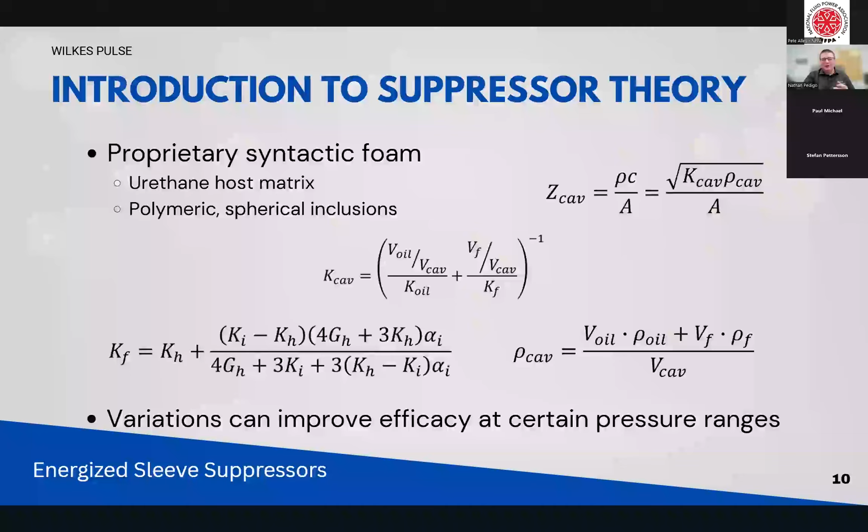We have developed a few different variations of this foam, which can improve the efficacy at certain pressure ranges. So these foams are kind of designed for one pressure range in mind, but they will still have an effect at any other pressure range. It's just that they might not have a real optimal effect.

So for a comparison of these two different styles of suppressors, they both have their strengths and weaknesses. A bladder style suppressor can be really tuned for optimal performance, I'll talk about that a little bit later in the case study. You can get really, really high performance out of these. An energized sleeve suppressor, you're not going to be able to tune it, but it is very effective across a broad range of pressures, which is really useful for a lot of systems now that will kind of idle at 1,000 psi and then jump up to 3,000 psi whenever they're working, things like that.

Bladder style suppressors are available with Buna, Viton, EPR seals, so we can pretty much make that for effectively all hydraulic fluids you might be interested in. The energized sleeve suppressors are currently only available for what you would use a Buna for, which is still most hydraulic systems, but they also have very limited modes of failure.

Bladder style suppressors will need regular but kind of minimal maintenance. I would liken it to basically checking the tire pressure on your car, it's pretty much that simple. The energized sleeve style suppressors are 100% maintenance free, and that makes them really optimal for submerged pump applications.

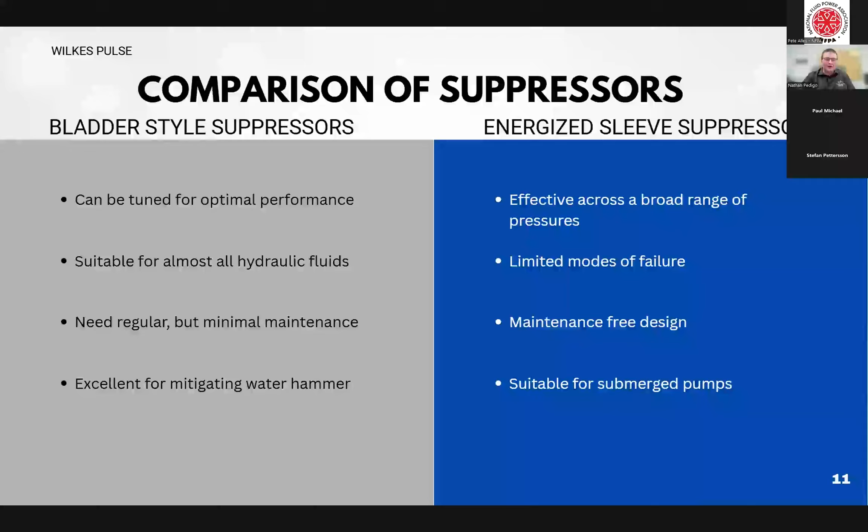Bladder style suppressors, on the other hand, are really, really, truly excellent at mitigating water hammer events. So if you put them pretty close to whatever is causing your water hammer, this will take away most of the energy from that water hammer.

Our standard sizes are kind of targeted by line size. The 56 series targets 3/8 to 5/8 inch line size, and we have those available in either 3,000 or 5,000 psi pressure ratings. These are approximately 7 inches long, so they're quite tiny, and they weigh just a few pounds. The 56 series is really kind of aimed at off-road and small tractor type applications.

The 81 series is slightly larger, targeted for that 1/2 inch to 1 inch line size. Pressure ratings again in 3,000 and 5,000 psi. Slightly longer and slightly heavier, but again kind of targeted more on that low end. I think these have a flow rate of approximately 32 GPM, which is what we usually recommend as the maximum.

The 138 series targets basically the 1 inch to 2 inch line sizes, really more that 1 to 1.5 inch is where it shines. These are available in 1,000, 3,000, and 5,000 psi pressure ratings, simply because some people really need that weight savings and they don't go up to a higher pressure. These are a little bit longer, just under 9 inches, and they're also getting a little bit heavier.

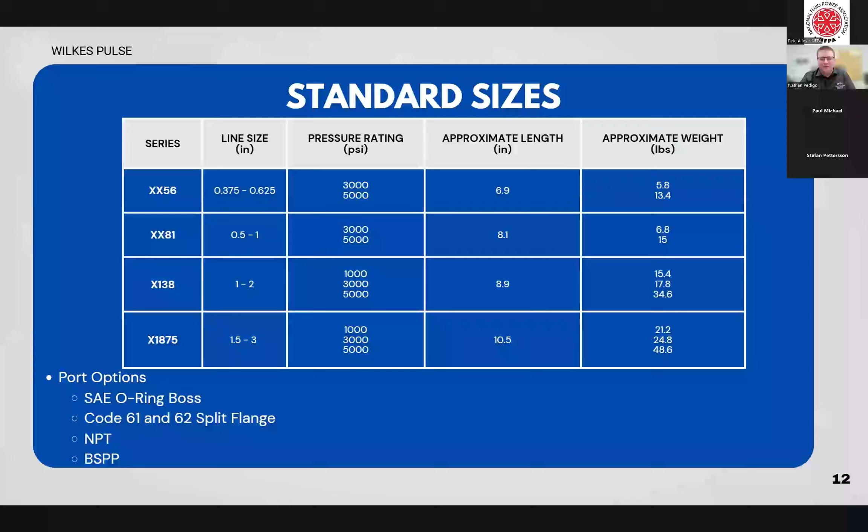For port options, we offer most standard sizes of SAE O-ring Boss, code 61, code 62 split flange, NPT and BSPP. As far as materials go, most of our suppressors are going to be carbon steel, but we also do offer variations in 303 stainless and 316 stainless. I'd say probably 95% of our suppressors that leave our shop go out as black oxide, but we will also do things like ENP, paint, and powder coat to customer specifications.

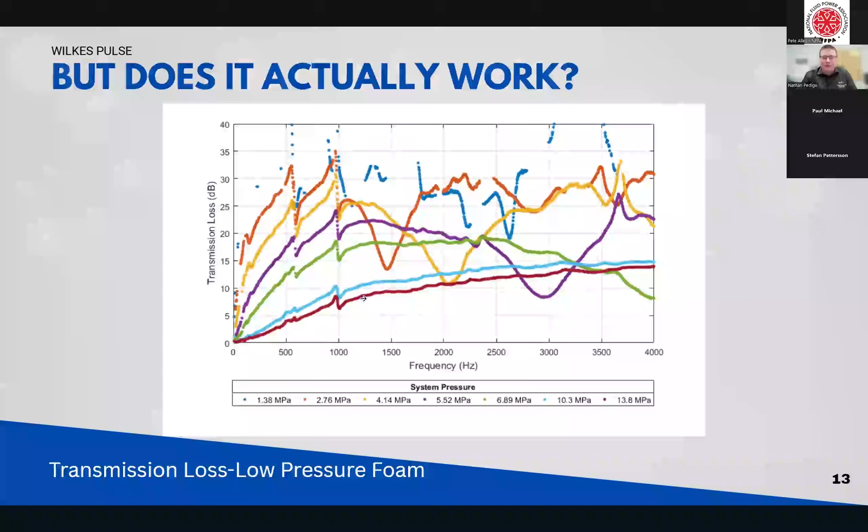Does that answer the question? I would hope. All right. Okay, are there any other questions at this time before I get into some of the applications we're on and then some case studies? No other questions right now. All right, sounds good.

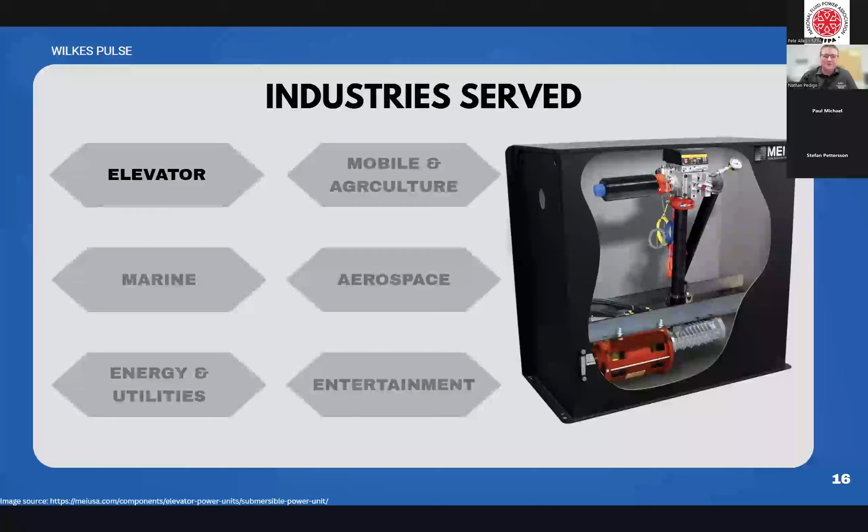In the marine sector, we do quite a bit of business for fin stabilizers, but we also do business with navies, cutting down on hydraulic noise in their vessels. Also, we've been used on things like water treatment plants for the nuclear aircraft carriers the U.S. has, and a lot of different things like that. We've also been used by fishermen to reduce the winch noise they were putting out when trying to pull in their nets or lines. As it turns out, whales are pretty smart, and they would track these boats and eat the fish before they got to the boat. So we had some fishermen install them, and basically the whales left them alone after that.

In the energies and utilities sector, we do a lot of suppressors into BOPs, blowout preventers on oil rigs. Our suppressors are used in the charging systems for these blowout preventers. Basically, the blowout preventer has a big bank of accumulators, hundreds and hundreds of gallons of oil for the accumulators, and our suppressor is there to protect the bladders of those accumulators. We've also been used in a power plant for a cooling system on their turbines. They needed to mist a coolant into the turbines, and our suppressor was able to make that a very controlled misting application rather than having spurts.

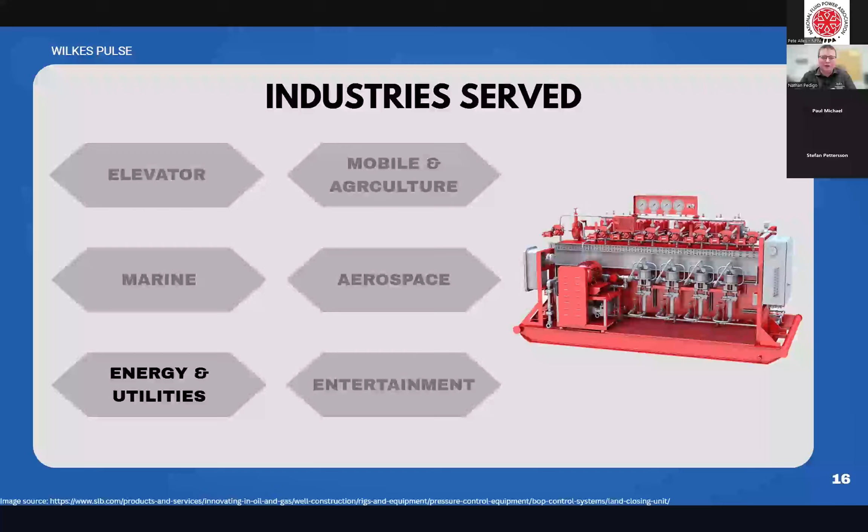In the mobile and agricultural sectors, we do a lot of work. We're on things like large mining trucks produced by Caterpillar, we're on windrowers just kind of keeping the cab quiet, and we're even on things like balers, or those kind of drag-along hydraulic equipment that you'll have behind tractors on working farms.

On that baler, we were in a little bit of a different application. Primarily we're used for noise, but in that application it was used for shock. For some reason, on their return line they had a pressure spike coming through that was destroying their chillers. So they installed our $600 device and protected a $10,000 chiller unit that they had to keep replacing over and over on warranty.

In the aerospace sector, we do a lot of work for test stands. That's probably the majority of what we do for aerospace, but we're also on different launch structures, and we know that we were on the NASA crawler a while back. But mostly it's going to be the test stands and those big launch structures.

In the entertainment industry, we probably have the least direct communication with the end users or end designers. But we've been used on things like the hydraulic launches for roller coasters, we've also been used on aquariums for water handling, and we've been used in different zoos for things like elephant gates.

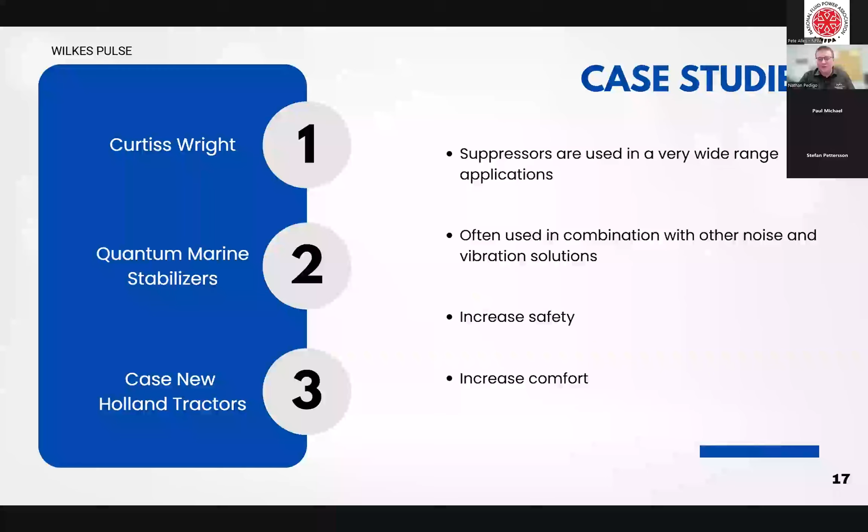Getting into the case studies, as you can tell, our suppressors are in a very wide range of applications, and they're often used in combination with another noise or vibration solution. Really big ones are going to be enclosures and vibration isolation mounts. Our customers will use us to increase safety or increase comfort, or usually both.

So at Curtiss Wright, a manufacturing engineer called us up, tasked with solving a problem at an industrial press application. This was a big table press, and they had a fairly large hydraulic unit in a pump room about 50 to 100 feet away, running lines from the pump room to the press. They had previously installed things like isolation mounts and added hose segments to that line, anything they could do to try to decrease the noise level. And that just really wasn't working well enough for them.

So they contacted us and we worked with them to select a suppressor appropriate for their system. We ended up with a bladder style 3138-16, so that's got -16 ports to match what he had on his system already. It's a 3138, so it's on the larger side but not super large. It can be supported without clamps, but we do usually suggest clamps for that. We chose a bladder style because he didn't have the restriction of not having access to nitrogen.

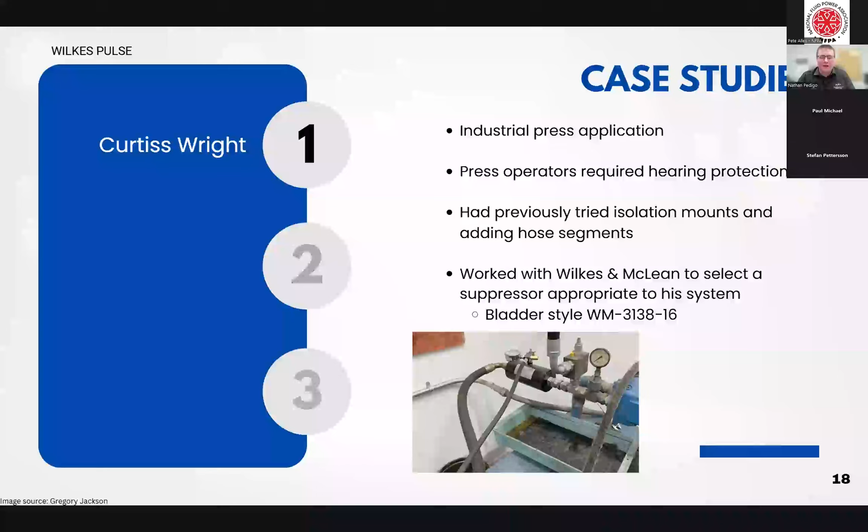Before installing the suppressor, his pump room was sitting around 88 decibels, his hallway was around 82 decibels, and his table press was around 80 decibels. Any of those noises are enough to where you probably should be wearing hearing protection. Definitely that 88 is more problematic and probably required it by local regulations.

After they installed the suppressor, the sound level went down to about 72 decibels in the pump room. That's on the louder side, but it's definitely not something where you need hearing protection. The hallway dropped down to about 59 decibels, and the table press itself dropped to about 55 decibels. Those last two are really comparable to a normal conversation, so definitely a safe level of sound for humans to hear indefinitely.

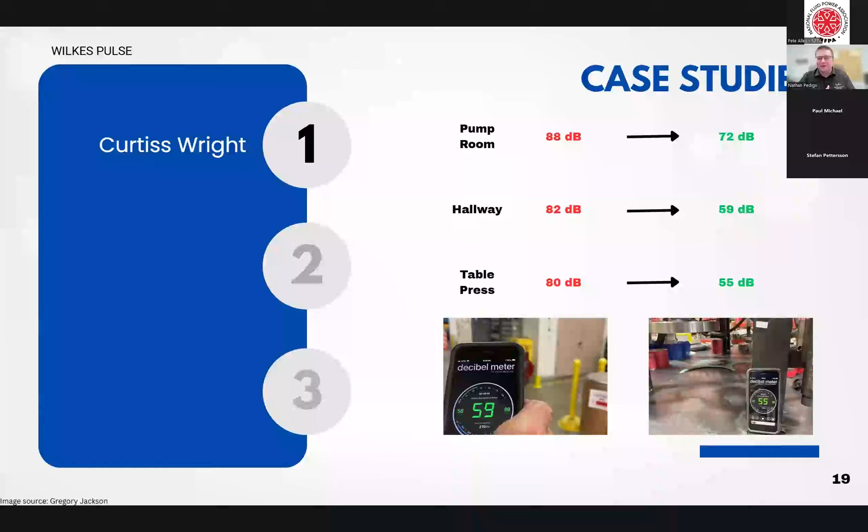And we got this nice quote from him when he provided us with this data: 'OMG, I can't explain the difference other than several people called to ask me why the pump is not running.' That's really why we do what we do. We want to make it to where people can't tell that their hydraulics are running.

Hey Nathan, we have a question that might work really well right here.

What type of pumps are noise suppressors more widely used on? Gear, piston, etc. When and if used on variable displacement piston pumps, is there any interference with pump control or response?

Probably just because over 90% of pumps used today are piston pumps, our suppressors are used mostly on piston pumps. It will not in any way interfere with your variable displacement pumps. It's basically installed just off of the pump, right where you would start your plumbing for whatever your system is. So it doesn't really impact the responsiveness in any significant way that we've ever heard of.

Thanks, Nathan. Moving on, Quantum Marine Stabilizers is a global hydraulics company that services large yachts and mega yachts, kind of like the one down below. That yacht is the Flying Fox. It's about a 500-foot yacht.

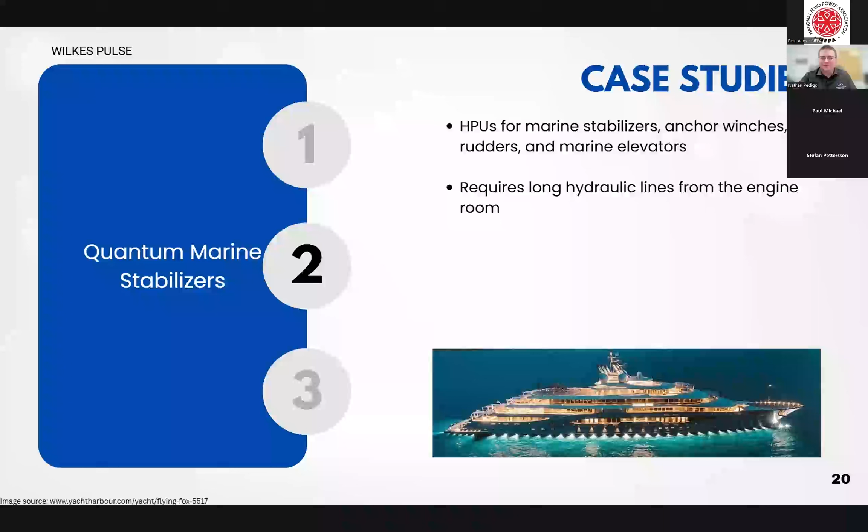So they were unable to reduce the noise in the staterooms to a satisfactory level, because those long lines from the engine room radiate sound throughout the ship. The big problem was that the sound in the oil was causing massive vibration of the pipes, and that was radiating sound.

They had tried things like isolation mounts, but they weren't particularly effective, because you can't just install an isolation mount every 2 inches and be cost effective.

So we supplied them with 3081, 5081, and 3138 series suppressors. Again, this is kind of like our two mid sizes, and they use both bladder and energized sleeve suppressors depending on the system.

The bladder style suppressors are mostly for their smaller systems, and those vessels are usually in port more frequently and can be serviced more readily. The energized sleeve style suppressors are currently the larger ones for larger systems on more ocean-faring yachts.

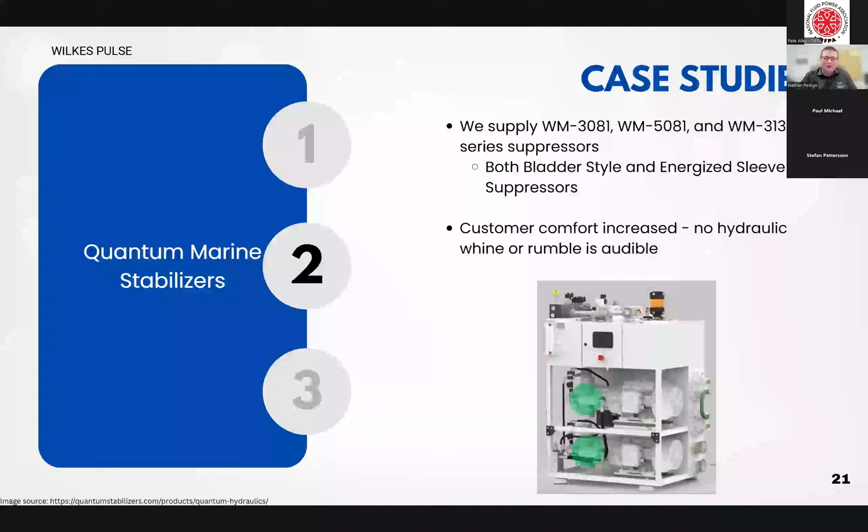So their customer comfort was increased. They no longer have any hydraulic whine or rumble in the staterooms, and effectively we're the reason certain ultra wealthy people can sleep well at night.

Moving on to Case New Holland tractors. Recently we were contacted by a few service technicians from Case New Holland. They were working on the New Holland Workmaster 120 and Case Farmall 115A tractors. These are very similar tractors, using basically the same hydraulic system for the power steering.

The operators were reporting a really annoying whine when doing anything with their power steering and even some of the end effectors. We had previously installed a suppressor on Navistar trucks for a similar power steering application, so we were pretty confident we could help them.

We told them we couldn't help with the engine noise, but we could help with that whine. Prior to contacting us, those service technicians had tried things like isolation pads, and even replacing the pump unit didn't affect anything at all, so they called us up.

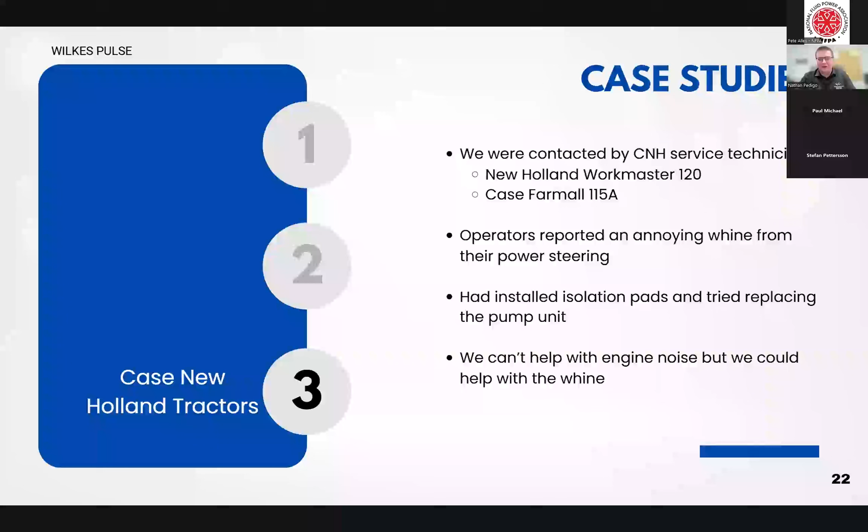We recommended a 3056 half NPT, our smallest size, geared towards tractor and off-road units. I should also note this was an ES, because the farmers bringing these in usually don't have access to a tank of nitrogen to charge a suppressor with, so we wanted to get them a no-maintenance solution.

So I'm going to play a couple of videos showing before and after the suppressor was installed. In the before video, you'll hear a lot of whine anytime the steering wheel is moved at all—it will actually drown out the engine this guy is sitting on top of. Hopefully you can all hear that.

I can't hear it, sorry. Is anyone else having issues hearing it? I'm not hearing it either, Nathan. Unfortunately, I don't know how to resolve that. Does anyone know how to fix that through Zoom? It's just not something I've ever run into before. Yeah, I'm not sure how to resolve that, to be honest, Nathan.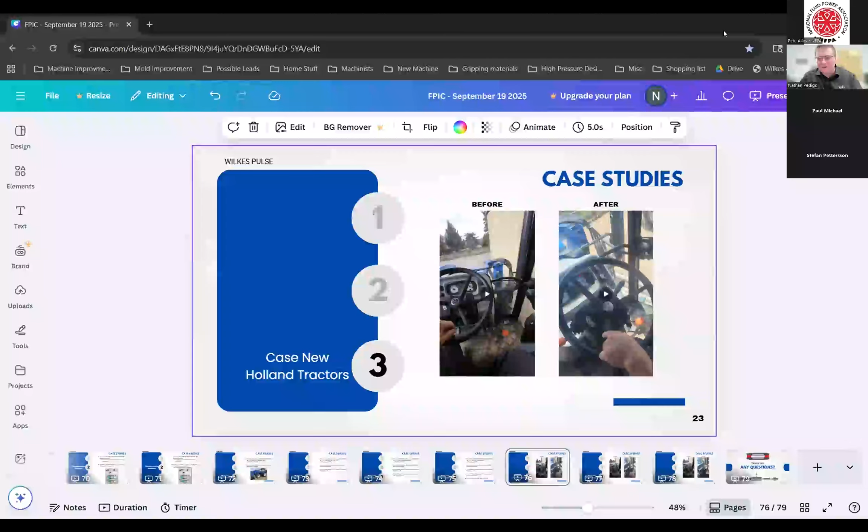Well, I can just describe what was going on in these videos. Before, you had a very powerful whine that was even drowning out the diesel engine, and it increased as he got closer to full right or full left on his power steering. In the after video, you really don't hear the power steering at all until you get very close to full left or full right, but you will hear the diesel engine, and that engine overpowers the whine a bit. I can look at getting these two videos onto YouTube and providing them to the hosts.

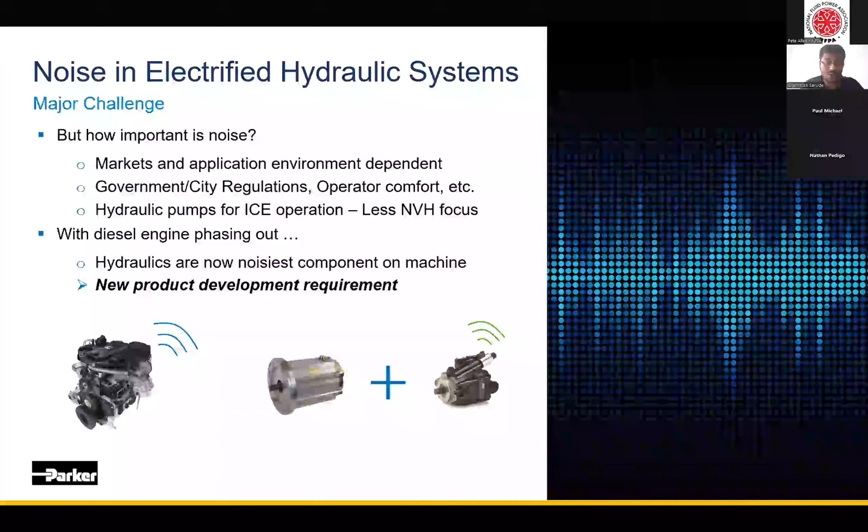Within the pump itself, there are several fundamental causes of this noise being generated. The first and foremost is noise coming from fluid sources due to the pressure pulsations coming from the displacing actions of different hydraulic pump technologies. The way this fluid is transported within the pump technologies can result in turbulence and cavitation that can also impact noise.

As Sudhir briefly mentioned, all these also translate to mechanical sources, or they actuate the structure, and therefore the structural response of the entire pump body or the moving parts that are supported by several lubricating films in the hydraulic pump can also cause noise during hydraulic pump operation.

The last aspect is more miscellaneous: how the pump is mounted, the operating conditions, the resonance of the system it is mounted in, any abrupt operating condition change or change in loads can also translate into hydraulic pump noise. Depending on the different pump technologies, the operating limits, and the fundamental displacement actions, there is a wide spectrum of hydraulic pump technologies available for users in today's market.

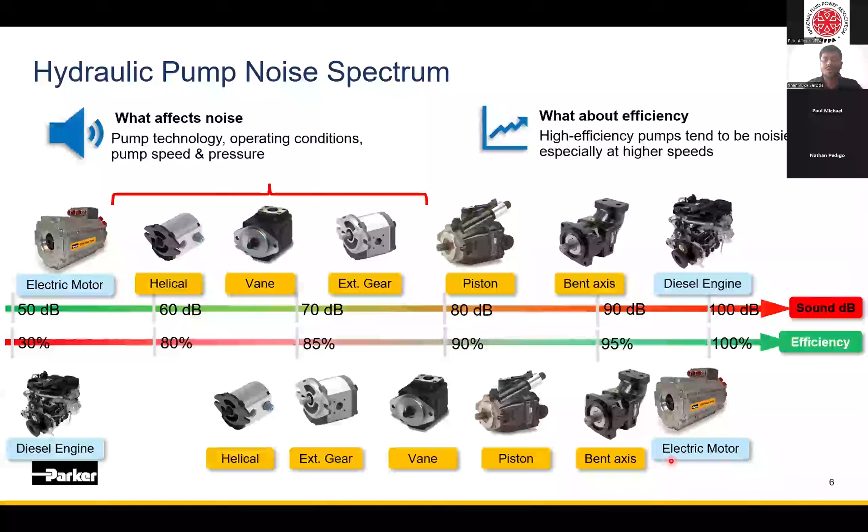With electrification having a broader impact beyond noise, in terms of lower emissions and ability to operate more efficiently from cleaner sources of fluid, beyond the hydraulic product portfolio of Parker, which is the bread and butter for Parker Hannifin Corporation.

Here I also want to present the electrification focused portfolio. To name a few, this is the global vehicle motor, the GVM, widely used in OEMs. To drive the motor, we have the global vehicle inverter. But the electrification efforts at Parker do not stop at just motors and inverters.

A lot has to change on the pumps that these prime movers drive. These future pump technologies, or the products developed, are based on configured e-pumps and integrated e-pumps based on our e-ready pump portfolios. In the next few slides, I would go into detail about what I mean by e-ready, but I want to pause here for a minute to see if there are any questions from the audience.

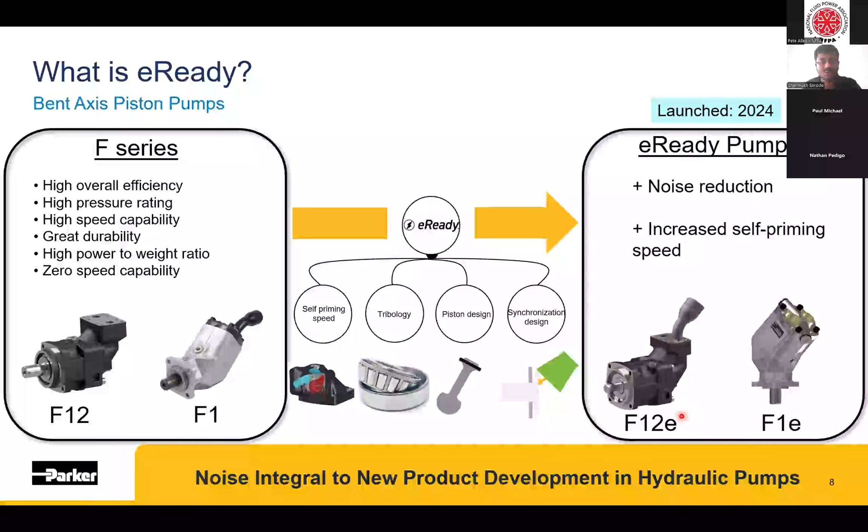These new E-Ready pumps were launched last year in 2024. This is a good example of how noise has become an integral part of new product development in hydraulic pumps in today's world, and as well as at Parker: how we achieve this noise-optimized design in the bent axis pump itself.

As we heard earlier, fluid borne noise is also a very critical aspect. So here I want to demonstrate 3 different design aspects that we improved on.

Firstly, we smoothened the flow paths in the ports of the hydraulic pumps using 3D CFD software. Here we are showing some results from Simerics.

Again, because the increase in self-priming speed was also a motivation that has to be tied with, and to avoid any cavitation when operating at higher speeds, in order to ensure that the piston bores or the displacement chambers are completely filled during the motion.

And the most important aspect for noise is the port plate, which decides the pressurization timing of the displacement chambers as they pressurize the fluid.

The other important aspect is also to think about how the structural aspect or the housing of the pump responds to the fluid dynamic phenomena happening inside the hydraulic pump unit. So here we use sound transfer path analysis and the structural responses to optimize the structure of the hydraulic unit itself.

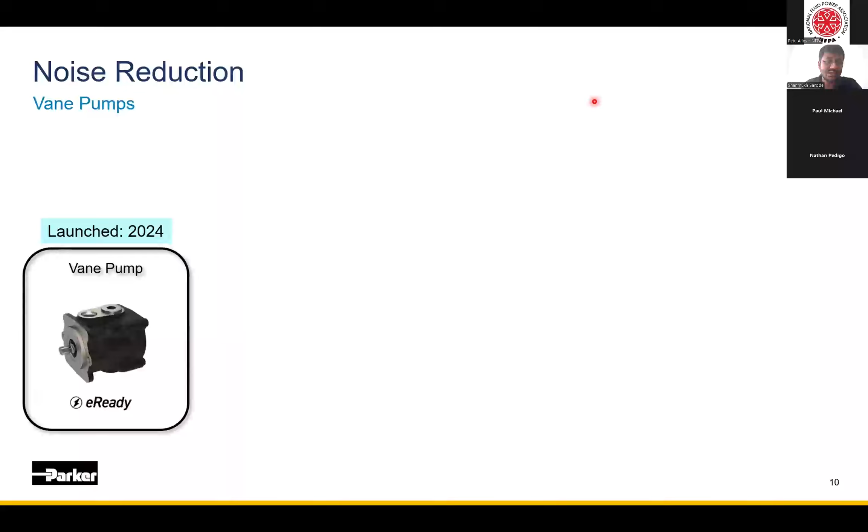This E-Ready vane pump was also launched in 2024, and what we were able to achieve was a much smaller cartridge. This was possible by optimizing the fluid passages in the pressurizing displacement chambers and some redesign in the ports. This enables us to downsize or reduce the weight of the pump itself.

But what it also helps is this new E-Ready T8 mini pump technology is 4 to 5 dB lower in noise compared to its predecessor, the T7. Here I show a noise level measurement at 2000 RPM for a range of pressures on the x-axis.

Beyond the lower noise operation, an important aspect of this product development was to increase the self-priming speed of these units. The T8 Mini has a self-priming speed of 5000 RPM, and these are speeds that the electric motor usually prefers to operate at.

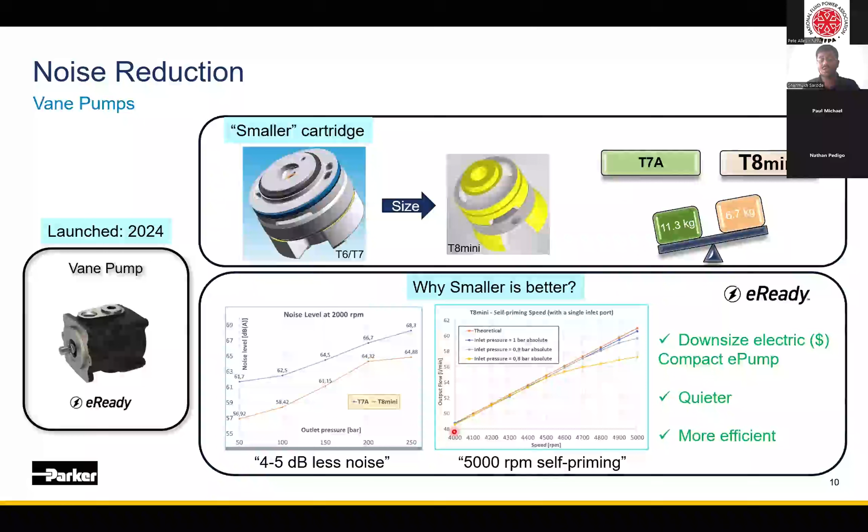So with the hydraulic pump now matching the preferred speeds of electric motors, it is possible to downsize the electric motor and the electric inverter in order to meet the same flow and pressure requirement from the application. This not only results in a compact e-pump, but also is a very cost-effective solution. The other important aspect is also that it's much quieter, given that the hydraulic noise is reduced even further.

Coming back to the noise spectrum for the hydraulic pump technologies, one other important recent development or recently growing market is for helical pump, gear pump technologies. These pump technologies present a very unique advantage in that during the pressurization, the dead volume is very minimum, or say near to zero.

What this allows the pump to do is during its operation, the ripples that the pump generates due to its pressurization action are much lower. And these low ripples then translate to lower noise perceived by the receiver in general.

So here I also want to take the opportunity to realign with the audience. Nathan also pointed this out, that 90% of the market today is high pressure piston pumps, mainly due to their ability to operate at high pressure very efficiently, and their ability to vary displacement, resulting in better flow control technologies. But the downside is noise.

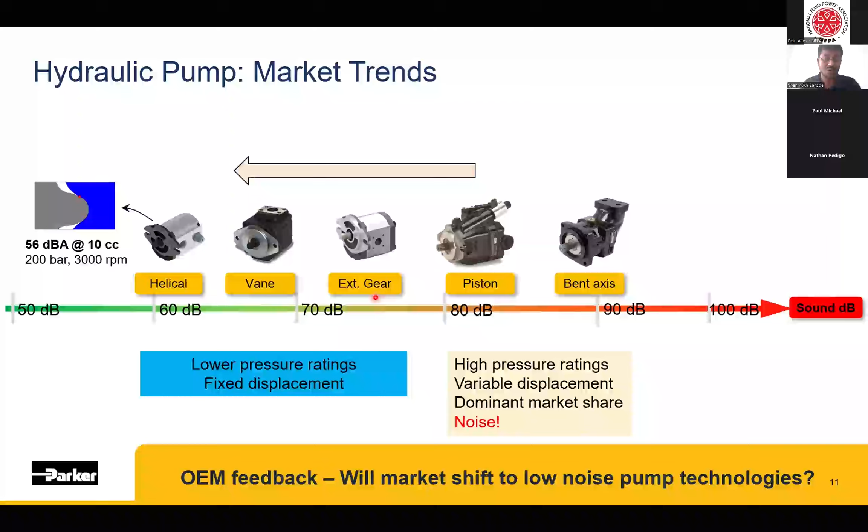I feel the OEMs or vehicle manufacturers will obviously have a better perspective on these trends, because they study their systems with different flow sources. So this could be something interesting to know from our customers or people in the audience as well.

But with that, I would like to also discuss the market trends that we have been hearing, or what is motivating Parker to develop newer pump product technologies.

The first interesting aspect is that the electric motor now has speed variability in it. So in order to achieve flow control with an electric motor driven fluid power system, it is possible to swap out the piston pumps for cheaper hydraulic pumps and also low noise pump options, cheaper as in cost effective compared to the piston pumps.

The other development that we see is high speed pumps. Here's a short comparison to meet a pressure and flow demand. If I have a 3000 RPM unit typical of an engine operated system, I would need a prime mover of 112 Newton meter if I want to swap it out for an electric motor. But with high speed pumps, this torque can be reduced to 67 Newton meter. And because the size as well as the cost of the electric motor is directly proportional to the torque, matching the self-priming speed with the high-speed operation of the electric motor has serious downsizing and cost-saving potential.

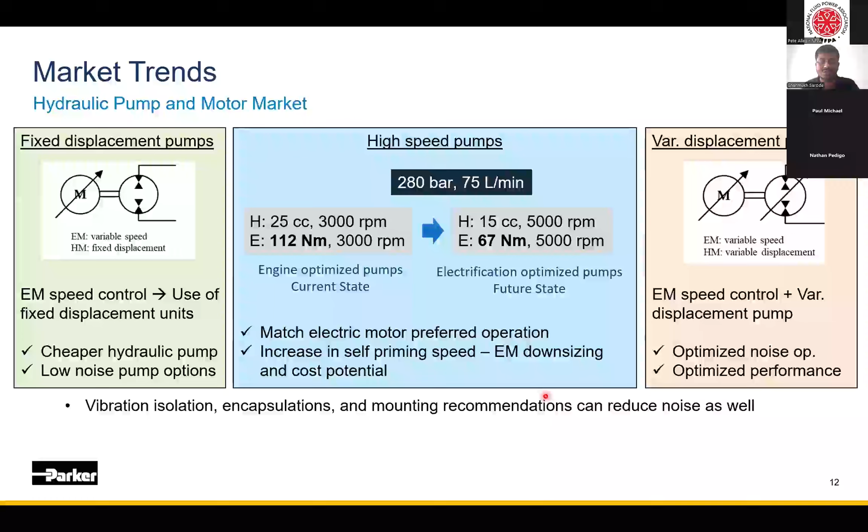With that, I want to point out that all these new product development initiatives Parker is focused on today for electrification or noise are based on feedback we receive from talking with our customers. And therefore, I welcome any feedback so that Parker can utilize its fluid power expertise to provide improved parts to our customers in the future. If required, I have my email address here, you can reach out to me, but that is all I had today. Thank you for your attention, and I'm open to any questions.

Thank you, Shanmukh. I don't see any questions unless anybody's putting them in the chat as well. Shanmukh, I have got a question for you. Yeah, go ahead. Paul from MSOE.

Just curious, we know that these products are used, or many of them are used, in industrial applications that are already operating with electric motors. I was wondering if you could explain why in this application where we're operating outdoors, the noise control seems to be more important than, if you will, in an industrial setting like a factory.